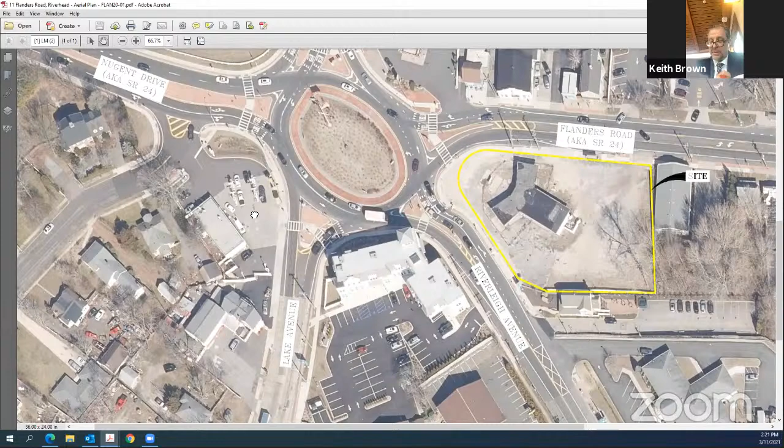The only other thing I'd like to point out in my overview is that we thought it'd be helpful for the planning board to see what the buildable envelope is of the property. Because of this irregular configuration and its location on the traffic circle, when you incorporate the town's zoning code bulk requirements, you can see that the overall building envelope is extremely limited. So my point being that there's no way around the fact that we need some variances.

What we've done is worked within the confines of the irregular shaped parcel located on the traffic circle, and we've come up with a site design after multiple variations. I'll allow Mr. Tartaglia to talk about it in a second, our civil engineer, but the home plate design was really the most advantageous for multiple reasons, which he'll elaborate on. So with that, I'd like to introduce Mr. Chris Tartaglia, Principal of High Point Engineering, our project engineer.

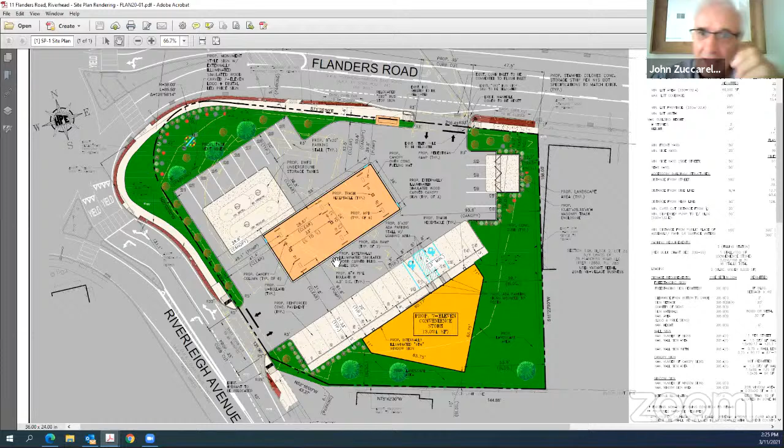So they still have access to the three other roads, and they limit someone going out into the road, possibly not being able to get a space to get in between, and not backing up the people going south into the circle. So I'm not saying to do it because I'm not a traffic engineer, but could you look at the possibility of limiting the egress onto Flanders Road to a right turn only, and then direct traffic for those that may wish to go to one of the others, that they simply take the other side, they can go out onto the road. My comment is ended.

Mr. Zuccarelli, I think that's a great point. I'll address that right up front. Just for everyone's benefit, my name is Andrew Villari. I'm a traffic engineer from Stonefield Engineering and Design on behalf of the applicant.

So regarding access, just taking one step back, Flanders Road is a DOT roadway. Riverleigh Avenue is a Suffolk County roadway. We did submit this plan to the state back in September, just to make sure they were comfortable with the type of access we were showing. Mr. Zuccarelli, you're right on the money — left turns out onto Flanders Road, the state would not be amenable to. So in terms of exiting traffic on Flanders Road, you'll have to make a right turn out. And it's not the worst case in the world, because if you're trying to go any other direction, you could use the driveway on Riverleigh to get back to the roundabout and head all points. I think that's a very astute comment that you made.

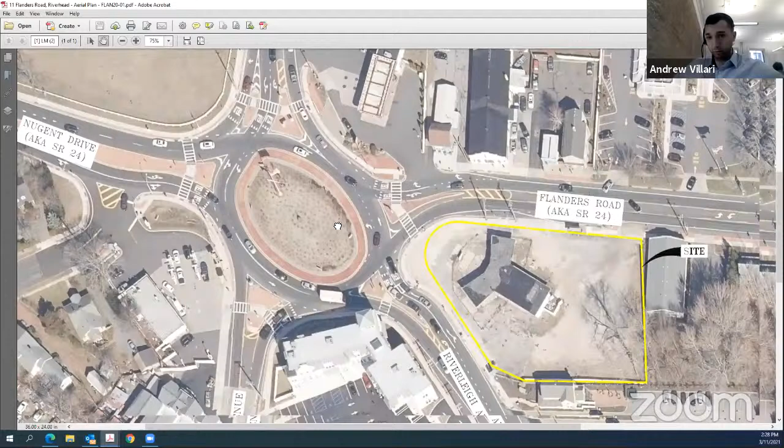And in the same vein, the pedestrian improvements are key here. Previously, I don't think it would have been a great environment for pedestrians. But after this application, I think the county did an amazing job designing this. There are pedestrian refuge islands basically in the middle of every approach. So if you're heading from downtown Riverhead and you want to walk into the 7-Eleven store, you do have the ability to do so. It's all very well connected and very well orchestrated.

You may be thinking, why would someone walk to a 7-Eleven with a gas station? That's an okay thought to have. It's because this development is not going to be like the other two gas stations on the property. The other two have convenience stores, but as Mr. Brown mentioned, they're very, very small — there's not a lot of offering. The new 7-Eleven prototypes, I'm not sure if you've seen some of them around the island, they're very nice, very modern. There's a coffee bar inside, there's a fresh food offering. Those types of offerings would entice pedestrians. I think it's a great location for 7-Eleven because of the pedestrian improvements and what enables people to get on and off the site so safely.

Transitioning from pedestrians to vehicles, because this is definitely going to be a vehicle-based development — it's a gas station, of course — this use, in my review, is a very good use for this intersection. Now, I say that for a number of reasons, but probably first and foremost is that a gas station previously existed here, and there are other ones in the area. What type of traffic is associated with a gas station or a convenience store?

It's what's called in the industry pass-by traffic. You're traveling through the roundabout, heading in any different direction — maybe you're going to work, maybe you're going to points east. You're heading through the intersection, you need to get gas, you see a nice 7-Eleven gas station, you pull off, you hit the site, you get the gas, you get your cup of coffee, and then you keep going. You were already going through the roundabout as it was, so you're not necessarily adding new traffic to the development.

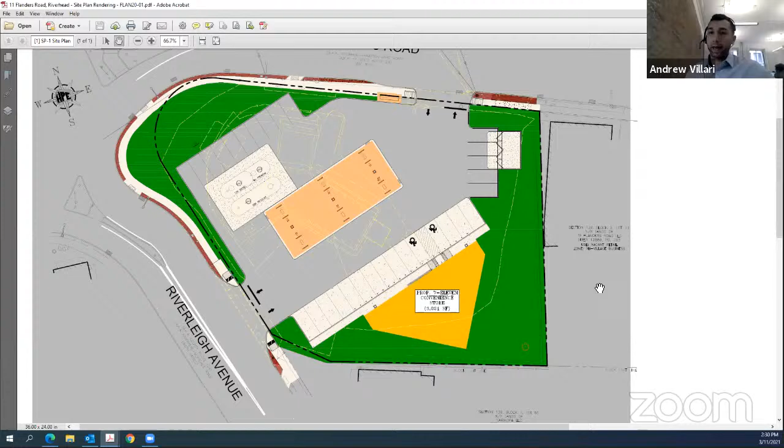Mr. Trezza mentioned that this is a highway business district, so any of the typical uses in a highway business district could go on this site. Those uses would have more new traffic added to the area. If this was an office, there'd be more traffic. A 7-Eleven just preys on the traffic that's already adjacent to it.

So it's actually a very good use here for not increasing the delay that you may be accustomed to going through the intersection. We are in the process of wrapping up a traffic impact study. We'll be more than happy to submit that to this board before the next meeting. We are doing a level of service analysis where we've done counts and analysis. The early indication is that the driveways would operate very well given the site layout.

Like I mentioned, the access on Flanders would have left turns out restricted, and the access on Riverleigh would be restricted to right in, right out only. When you restrict certain movements, you may have unwanted traffic in other places. If you can't make a left out, how do you get where you're going? Being located on this roundabout is a great thing, because you could make a right turn out and still go in any direction you want, since you're going to get into the roundabout and you can go all 5 points here.

So just want to conclude here. I appreciate everyone's time listening to the application, but I really think this is a great application for this intersection that's been the subject of some blight for over a decade.

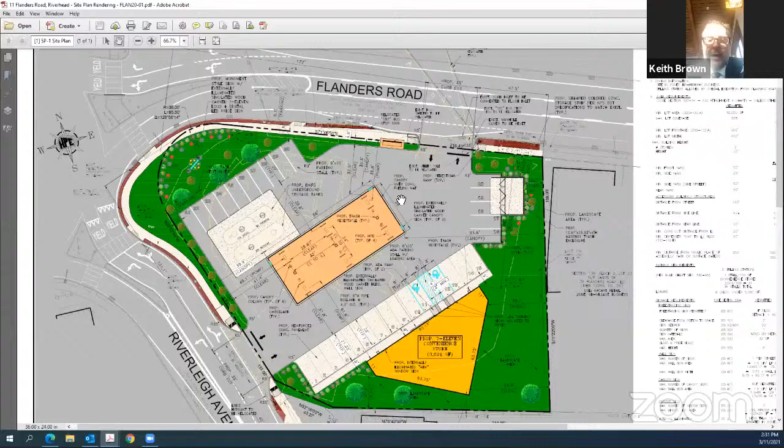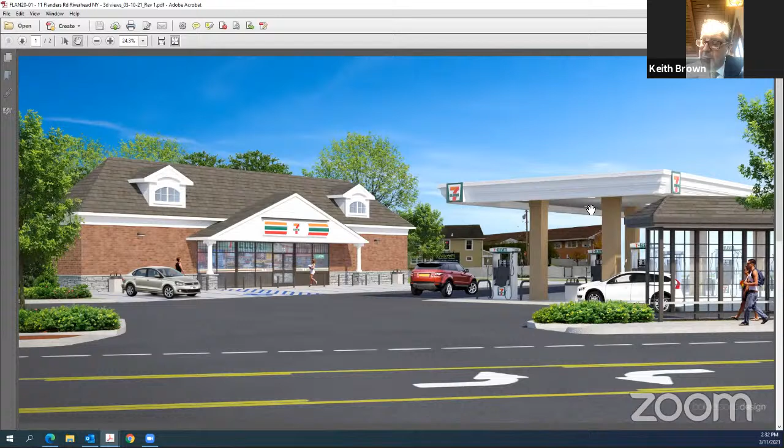Thank you, Andrew. And just two more points I'd like to bring up, Madam Chair: if we go back to the color renderings, Chris, we have enhanced architecture. Specifically, we have a cultured stone water table on the building, doghouse dormers on the roof. We have moldings, columns, and appointed details, as well as the canopy made of a beautiful crown molding design, as well as the enhanced landscaping.

So that concludes. Is that 7-Eleven corporate architecture?

This will be the only 7-Eleven that looks like this on Long Island. The one up on Flanders, further west? I'm not familiar, but this one is 7-Eleven, not far, going south. Yes, right, excuse me. This design is unique to this location. It looks like the one south. Yeah, it looks similar to me. I don't think so, but the dormers are there. The one on Flanders River Road, it's HardiePlank. Yeah, HardieBoard.

Can I ask a question, please? How does the 7-Eleven convenience store improve the downtown? You made a statement that it improves the downtown. I'd like to know how it does, and I also want to know how this fits in with the overlay district.

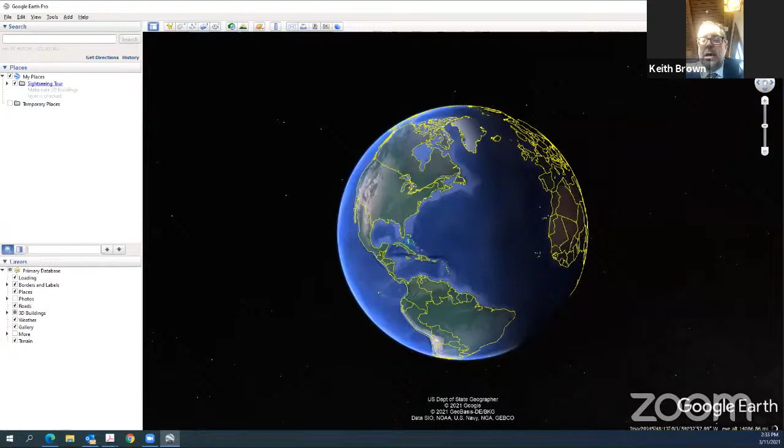Sure. So as it relates to the downtown, having a convenience store where people congregate, you might have a family ride their bicycles down, or kayaking available right on the Peconic River there, or people out shopping who want to walk across, as Mr. Villari said, there's now pedestrian refuge places where they can utilize that.

I'm trying to understand how this improves the downtown, and how it fits in with the overlay district. Sure, it fits in with downtown in a number of different ways. As I was saying, people who are out on their daily routine come to downtown Riverhead, and they don't necessarily want to stop for long. They want to grab something quick, a cup of coffee or something because they want to get to where they're going, or they're out shopping or whatnot.

But in terms of the overall overlay district, the owners of 11 Flanders have been paying attention to what has been developing in the town. The idea that sewers would come to this area has been talked about for the better part of a decade, but there is no hope in the future of ever getting sewers anytime soon. So the point is that they tried to do several different developments, but ultimately this is the only one available where they had a proposed tenant interested in utilizing the property. So it creates an opportunity for the town to repurpose this site.

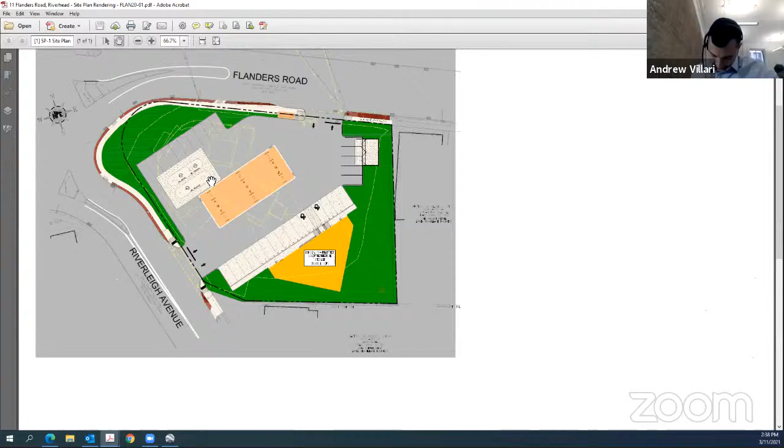Deceleration lanes to get into the driveways? I don't see them, so I'm just saying you might think about them, okay? You also will have guaranteed landscaping trucks coming into this gas station, and the landscaping trucks are the length of a truck plus the length of a trailer behind them. The parking stalls or parking spaces are not going to be sufficient, so you need to take that into consideration.

My question also is, is 7-Eleven a gas station now? Are they branding themselves as a gas supplier? This is not a new concept for 7-Eleven - they have many gas stations on Long Island currently and across the country. So it's their branded, private branded gas. That's correct, in Manorville.

I think one of the biggest issues that we have here is the accessory use. Would this be happening without the 7-Eleven? Would you be entertaining putting in a gas station without a 7-Eleven? No, would not, it would be impossible.

Okay, our code would not look at this and say this 7-Eleven was accessory to - it's a separate use. Anthony, are you there, can you step in? What I would say is I don't want to get too crazy because I'm going to prepare a report identifying the issues. But one issue the applicant should be aware of - they were involved with BOLA, where the planning board raised the question about the 2,000 square foot building at that time, which was reduced to 1,200 square feet. So the size of the building is going to be an issue. While that's a determination of the Zoning Board of Appeals, the planning board has generally been advising the zoning board through their referral comments about the size of the building. So that's going to be an issue we'll discuss. And just one comment - the applicant doesn't have to respond, but the dumpster sitting on the road is also a major issue.

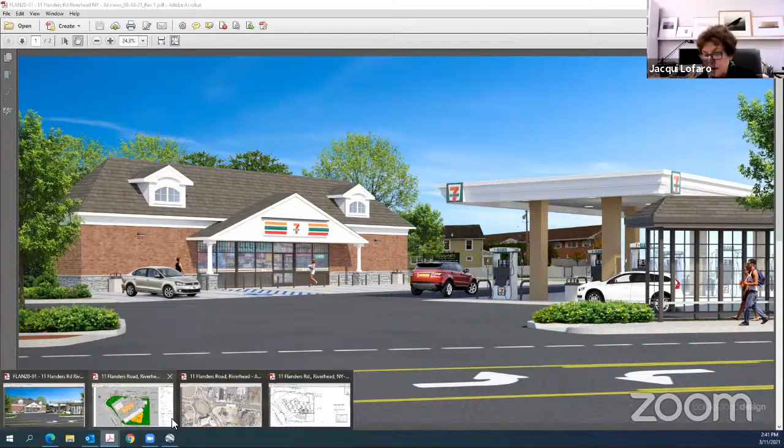Is this a high priority area at all for septic? Yes. Okay, so you're aware of that, Keith? Yes, we are. Okay, you are.

So I think you've heard a whole bunch of questions. Jacqui, I have a comment, if I may. The applicant has gone on this afternoon telling us how great this convenience store is going to be for the neighborhood, that people are going to be walking in and shop here. And that tells me that they're not looking at it as an accessory use to the gas station. So I'm hearing it's one thing, but they're trying to put it into our code as an accessory use.

If I may, Mrs. Burke. Yes. I am abundantly aware of the attempts by Riverhead and Southampton to make downtown Riverhead more walkable. I was merely pointing out that we have anticipated that in our design, that we have sidewalks that tie into the work done on the circle that Mr. Villari talked about, so that pedestrians crossing through the side of the traffic circle have refuge points they can go to, and then get onto our site without being immediately into a parking lot. That was really what I was trying to say.

But in terms of the use itself, they complement one another. You're also talking about the fact that it'll enhance downtown Riverhead. So I think you've made me believe that this is a separate use, not an accessory use. Well, I'm sorry if I led you to believe that, but I was merely pointing out how the use will fit in with the surrounding area.

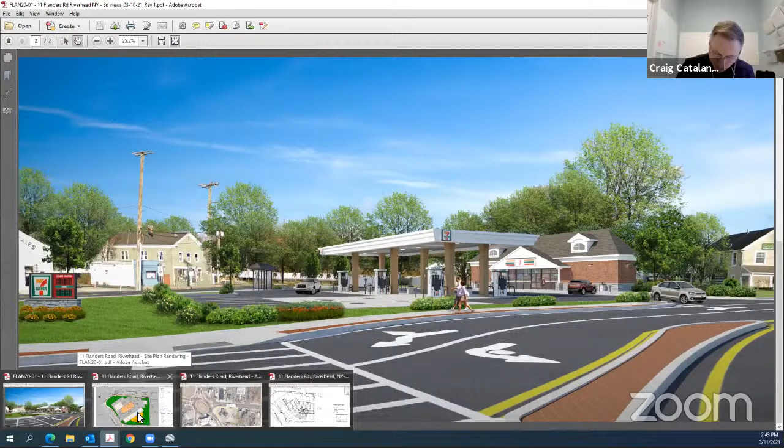Maybe you should think about putting a full-fledged supermarket there. That would be popular, because as Dennis said, this is a food desert, this area, and what it needs is a wonderful supermarket. You do have the farmer's market. I was just going to say, there is a farmer's market on Flanders Road, not that far down the road.

So I would submit to the board to think about the fact that 7-Eleven offers many of the things offered in a supermarket, just at a smaller level because it's a smaller size store. So in terms of grocery items and sundry items, many of them do, and they also have prepared food items as well as many supermarkets do these days.

You would not say, or you're not going to represent that 7-Eleven is competitive with the prices of a local supermarket? No, but we like to call ourselves a convenience market, a smaller scale size, for people who just need a quick item, you know, you're going somewhere that day and you remember you forgot a set of forks or paper plates, so you grab them and buy them and walk out the door.

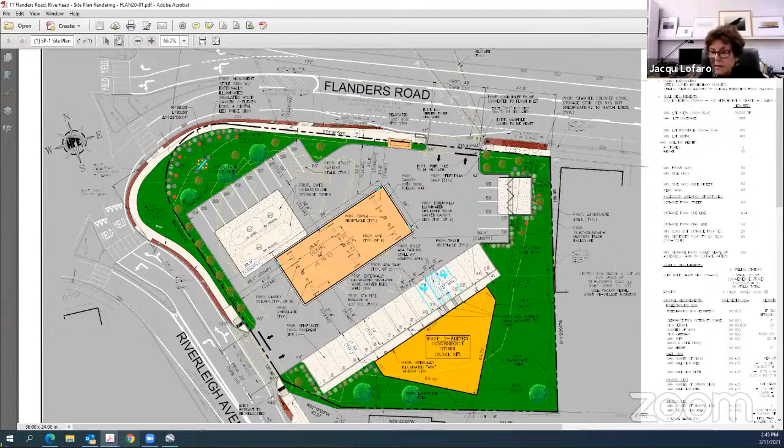Mr. Villari? Andrew, you want to tackle that? It'll be incorporated in the study, yes. What do you mean? In the traffic, okay.

Are there any other comments from the planning board? No. I have one quick question. You had mentioned the shallow water table. Do you know where the water table is in relation to the fuel tanks? I'm going to defer to Mr. Tartaglia. Okay, so Mr. Tartaglia, he actually worked on the other gas station located in the circle that had a similar issue.

Chris? Okay, yeah, groundwater is at about 5 feet below grade. So just like every other gas station at the circle, the tanks will be partially within water, but they're up to the task of being installed in water and surviving there. They do it in Florida every day, and groundwater is 1 to 2 feet deep in Florida, and there's plenty of gas stations there.

And what type of septic system would it be here? It's a conventional septic system with leaching pools, but it will be at a shallow depth. So as I explained, we need a little bit of a larger horizontal footprint because the depth of water is shallow. But you're in an IA, you're in a high priority area. That's what I'm asking. Right, we've already vetted this with the preliminary design with the health department for septic, and they're fine with it. So there's no septic issues here whatsoever.

Is it not a town issue? What's that? Anthony, doesn't the town require it? Yeah, if I have to double check, I don't have the ability to do it now, but I'm pretty sure this is the high priority area. If it is, it would have to be the new IA system, regardless of what the health department says. That's why I brought that up. Yep, that's accurate. We'll double check that, Gloria. Yeah, and the health department starting in July for any new construction will require an IA system.

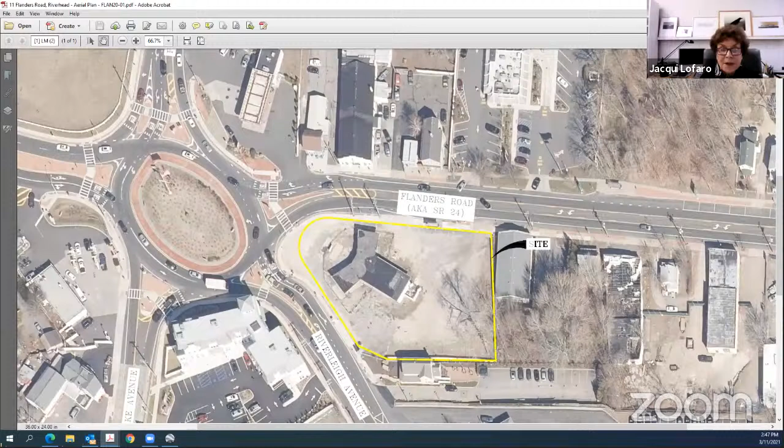Correct. Okay, so you have a shopping list of comments from us. And I took copious notes. I hope you heard them all, from solar to groundwater to traffic to accessory use, which is key. And so we'll leave it at that, Anthony. That's all. Where's Anthony? Yep, I'm right here. Okay, so you're going to write up a report.

Now, what about this pre-submission conference? So you're going to have the conference on the 25th. It'll be opened up to the public. You'll give a presentation again. We'll see if there's any comments from the public, from the CAC or any other groups. And then after that, within I believe it's 45 days, I'll bring a report to this board. You'll get it obviously before the meeting, and we'll go through all the issues.

Okay, very good, Madam Chair. Thank you, members of the board. Really appreciate the time, thank you very much. Thank you for coming. Yeah, all right, take care.

Okay, so we'll close out the work session and go into the afternoon session. Matthew, you're up first for completeness on number 2, Paris Project Management.

Can everybody see that? I'm just having a little bit of a connection issue. If you can see the— Yeah, we can see it, yep, good.

All right, so this is on for completeness. It's a lot line modification in North Sea at 1005 and 1017 Noyack Road. This came about via the health department. They did a correction deed back, I believe, in the late 80s that the health department just picked up on, that was never approved by the town. They just did it themselves. Unfortunately, they're missing a number of things on their map, mainly just to actually show the modification that's going through.

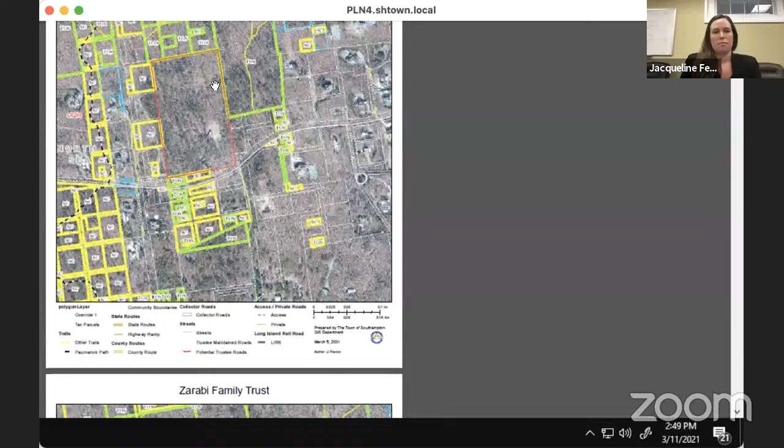Can everyone see the aerial? This red parcel here, this larger red parcel, is the subject property. It has minimal frontage on Great Hill Road, but it does have just enough.

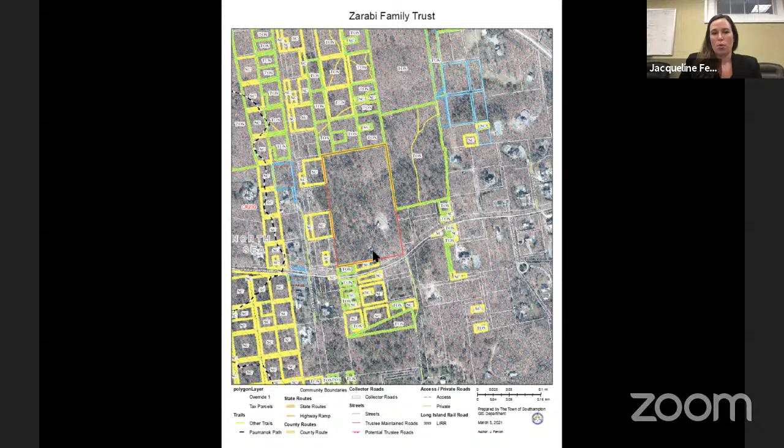With the planning board, we determined that it has a yield of 2 lots. They are providing a cluster plan, which has the lots orientated where the existing development was for the previous house and accessory structures. This is a zoomed in aerial of this.

Daphne, I believe these structures have been removed, am I correct? So the planning board issued a resolution of no objection to the demolishment of the existing structures, which was a single family residence, pool, and some accessory storage buildings in the back.

This is the proposed plan. Sorry, the topo kind of makes it hard to see on the scan, but essentially this area is all open space. The dark portion here is showing a proposed buffer, but this area here would be all proposed open space. They are using the benefits of the density incentive portion of the code, which is 330-9, to add 1 additional lot, which they are bringing from the CR 200 zoning district and from the school district, which is a town code requirement. So it does add the yield of 1 lot.

As you can see, they're accessing this via a common driveway for lots 1, 2, and 3. I prepared the applicant's EAF, part 1. Okay, can we ask some questions at this point? Oh sure, please.

You can get 3 buildable lots with this topography? We asked them for a slope analysis, so they'll have to give us a little more information on that. But I did walk the property. It's more hilly, essentially it looks flat where they had the house, but it does gently slope down, nothing extreme. I did walk the property during the pre-application review.

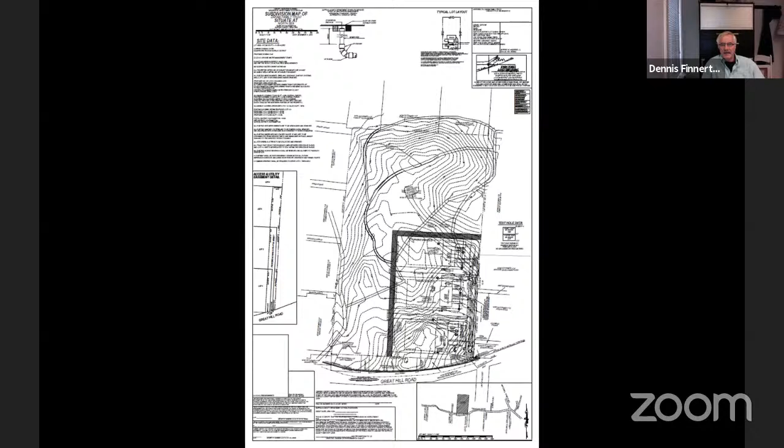I was getting this surfaced 2 or 3 years ago, and I would have thought this would have been resolved. I mean, are we going to say that this could completely change the map, the square footage? This is proposed open space that's going to be dedicated to the town. I mean, do we have a complete application with this major issue unresolved?

We were recommending that we do SEQRA and then deem it incomplete. Why would we do SEQRA? Because we have submission requirements, and they need the SEQRA determination to finalize the health department.

Yeah, but the question is, if that objection is going to stay with that property, and if he's been using that for a long time, you've got a serious issue there, and you haven't been able to get him to respond. Why are we proceeding with SEQRA?

I think we should just deem it incomplete until the information comes in. Also, I'd like to see this corner, the access to all 3 lots off this little corner, which we can't see, off Great Hill Road. I mean, there's some issues here.

Jackie, just so you're aware, it's 39 feet of frontage with a common driveway. I can try to zoom in, but... Of 39 feet of frontage, is that sufficient?

Or do they need a variance for that? No, they don't, because it's only 30 feet required. They don't, because we opted for the cluster plan for the open space benefits, so we're allowing them each to have around 10 or 12 feet of frontage. And access by one?

You're waiting for a slope analysis, which is not here. You're waiting for the determination of how they resolve this trail. I would say that I don't think we should proceed with SEQRA.

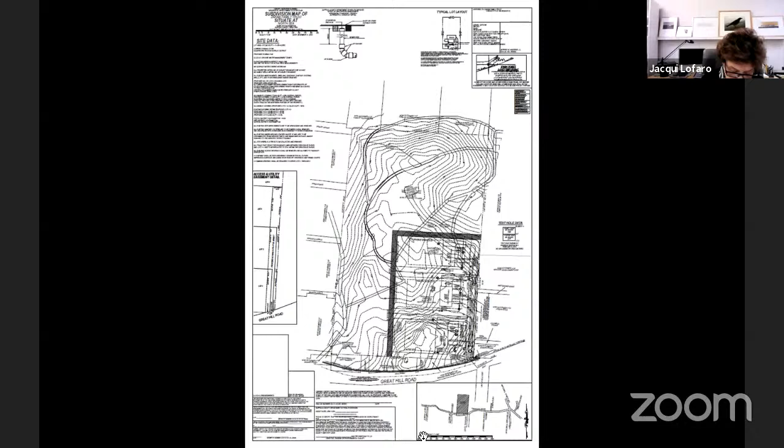Shall I have a motion to deem this incomplete, by Robin? Motion. Second by Dennis. All in favor? Aye. Opposed? Abstention? Six in favor.

Thank you. Jackie, again, Lillian Court, completeness. Yes, give me one moment to pull that up. And I don't believe the applicant, William Bates, was attending, but just in case he was able to log on.

Charles, is there a William Bates in the waiting room? Does he have a motel? I was just thinking the same thing. I'm sorry, thank you for doing that, Gloria, I really didn't want to do it. You're welcome. No, thank you. We could all use a little laugh.

Thank you, no William Bates. Okay, that's fine, he was aware of the issues. So go ahead, I'm just going to bring up the aerial.

All right, can you see that? This is a zoomed out aerial. This is a lot line modification between these 3 properties. And here's a more close, zoomed in aerial. So these 2 residential properties are essentially transferring some of their area here along their shared boundary, and then in exchange, they are getting a little bit wider to the north.

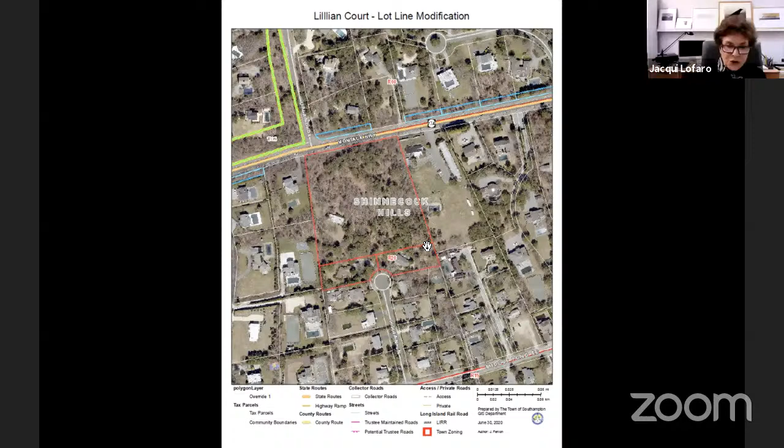Do you have a — there you go, okay. So if you can see here, they are right now flush. They are proposing a flag strip to gain access to Lillian Court, and this person is getting an equal exchange of area with that transfer. This property owner is proposing a larger area of transfer, which would give the 310 Montauk Highway access to Lillian Court.

Well, how are they getting in before? Lot 2, they had no access? They have existing lot configuration on Lillian Court. They came off Lillian Court, lot 2 and 3? Yeah, these homes are existing homes coming off Lillian Court. These both have driveways right here, and this one has a driveway right here.

Okay, but it's a pre-application. We deemed it incomplete in the summer. I do now have all the information I need to deem it complete and schedule a public hearing for April 8th. April 8th, yeah.

So basically, lot 1 can get access off of Lillian Court, and they don't have to use Montauk anymore. Correct. And then they are proposing an easement right here over this area, which we will discuss further upon review. But I just wanted to make you aware that this does give an access easement as well, I believe — to lot 3. Yeah, so over lot 3, they're giving an access easement over that portion to lot 1.

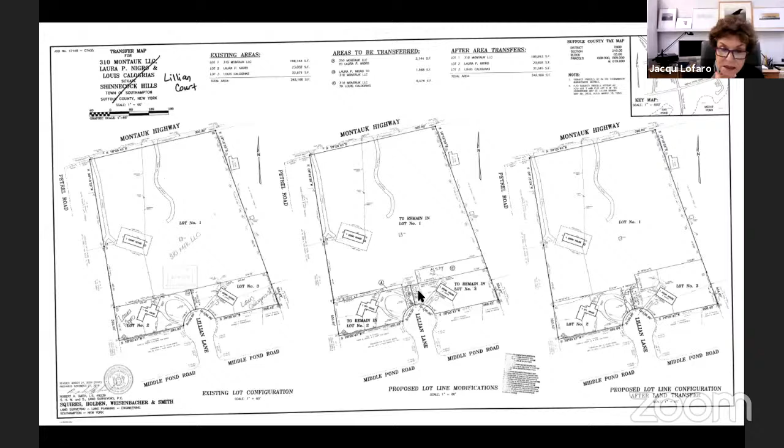Are they going to further subdivide this? Depending on how the easement is orchestrated and how we review this, it would possibly give future development and subdivision and access from Lillian Court to 310 Montauk Highway. I'm just asking you if that's their intent. They haven't said that specifically, but I believe that is their intent.

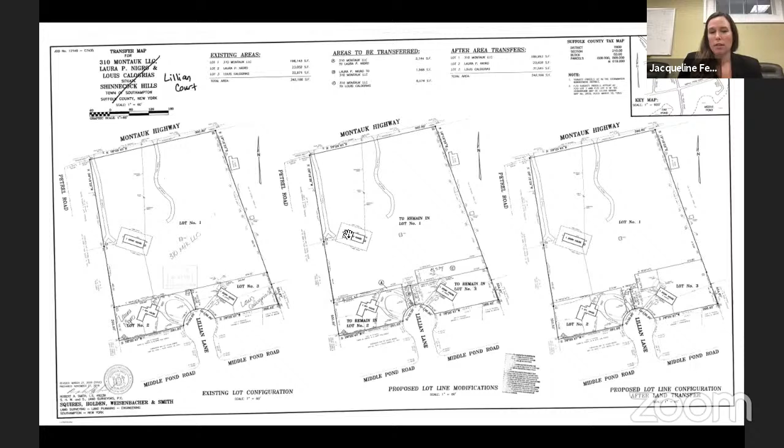Are they closing off the access on Montauk Highway, or is that access? Well, right now there's an existing house, so this is just a transfer. We can ask the applicant's attorney if they're proposing to physically alter the existing access at this point. Okay, so we're deeming it complete.

We're setting a public hearing for April 8th. Can I have a motion? Motion by Dennis, second by Gloria, and all in favor. Aye. Opposed, abstention, 6 in favor. Thayer's Hardware, Matthew.

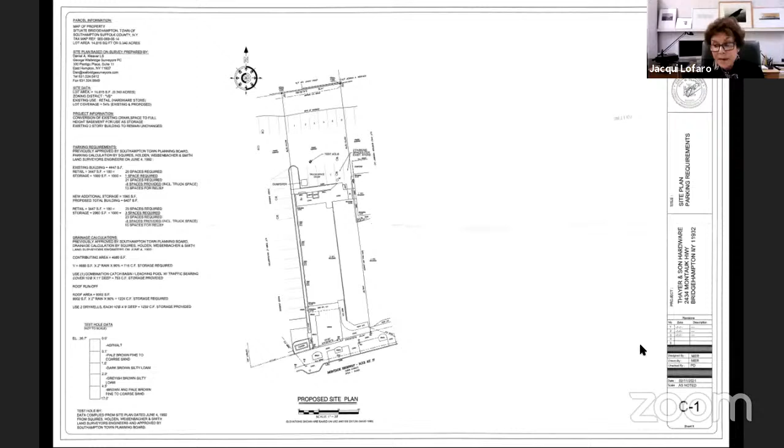Right, it has to be monitored. Yes, absolutely. How long do you think it'll take? It's a combination of hand digging and some electric machinery. I consider this, start to finish, to be about a 70-day project. So just double that, right? Always, we don't want to.

When is this supposed to start, best case? Dennis, is the storage going to be in the original building or the 1992 building, just for clarification? It's in the original building, on the eastern side. Correct, so it would all be coming out of the door that goes down into that as well.

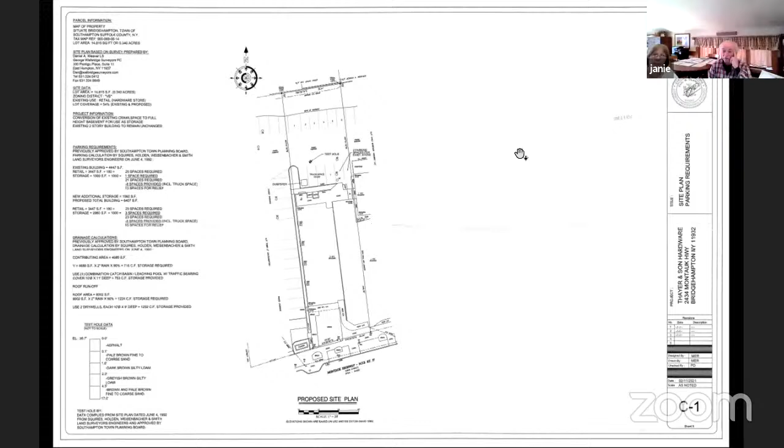I don't see an issue with expedited unless, but I'd like to put those conditions in, regarding how the dumpster will exit the property, et cetera. Jackie, the town engineer, has seen this already and issued some comments. They want to make sure there's no damage done to the adjacent parking area that they just redid. They'll ask for some kind of control measures to ensure that.

I did make findings to waive the hearing if everyone's okay with that, and it'll be referrals, in this case, to the fire marshal and the engineer's office. I don't know that it needs to go anywhere else.

Best case scenario, when would you be starting? We still have to go before the building department, obviously. So what we might consider, as we've been talking about, is as this moves along, if we need to, we'll just move it out of the summer traffic there. There's a lot of traffic back there. Into late fall, yeah. That's why I was asking for your best case scenario starting date, because I was thinking of the summer.

Well, we'll all be here in the fall, so we're okay with it, including...

Matthew, just make note of that, how the debris should not be taken out onto 27. Got it. The dumpster's going to have to exit west. Right, west? Yeah, north, actually north.

I walk through there all the time, taking that shortcut. Watch out for it, I feel sorry for that poor house on the corner there, every time I go in that back way. That's Maple, is that Maple Avenue? It's Maple. Maple runs across, parallel to the train station. Yeah, it's Corwith, or it has some funny name. Anyway, would you add that? Yeah, it's further south, you're right.

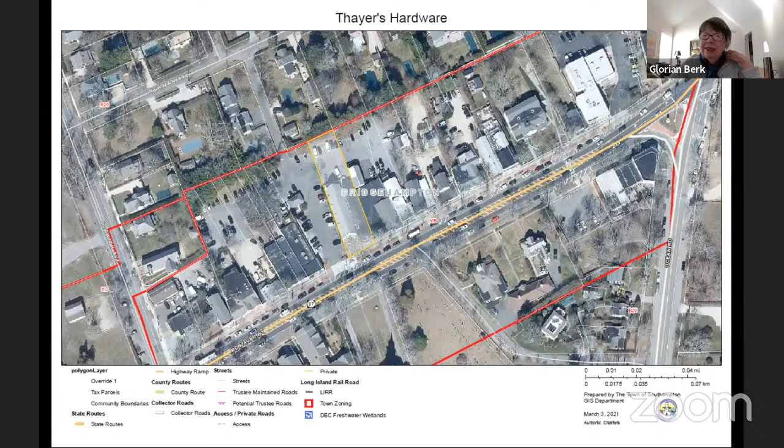All right, so I have a resolution prepared to deem it complete, set a 30-day written comment period, waive the hearing, and that'll go out. So, provided we hear back, this could be a pretty quick turnaround for the applicant, just to get this going.

I'll move it. Who said they'd move it? Dennis. Okay, second by Gloria, and all in favor? Opposed, abstention? Six in favor. Thank you, thank you, thanks for coming.

Clare, the Sag Harbor Antique Fire Museum.

The applicant submitted a revised plan, and I'll show it to you in a second. The applicant himself, Ed Dearman, couldn't attend, so he had Dennis Downs attend, but I don't see him. I just emailed him. So if you want to just table this, unless you have some comments, do you want me to just show you the changes?

And I have one comment. I think I saw it. I think that the entrance and exit should be closed off on Scuttle Hole Road. I think it should be totally closed. Do you want me to show you the plan?

Yep, we can just look at that real quick. I don't think it's closed, right? No, it's not closed. So this is the aerial, and here's what you're talking about, the Scuttle Hole Road. Yeah, and then Fire...

And then Geyer, which is right now - if you want to see the revised plan, which shows both the site plan and the interior, this is where they're having their parking spaces. And there's no proposed parking around here.

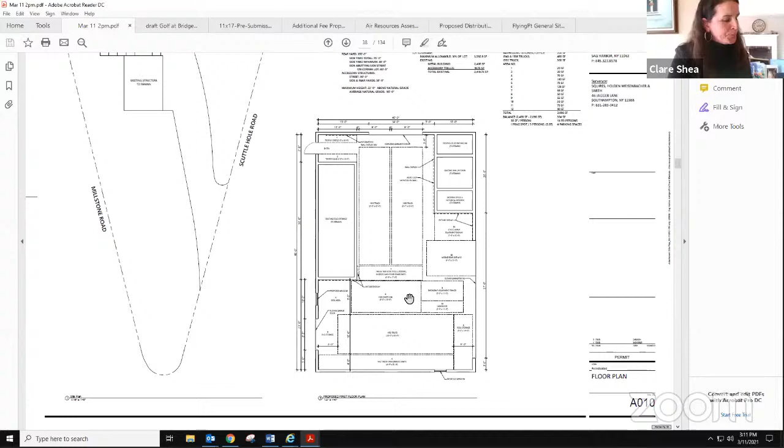And then we would want it closed off with some kind of nice looking gate, and not used at all until it was necessary to use it. Okay, great, I will. Thank you - no action. Anthony, Speonk property.

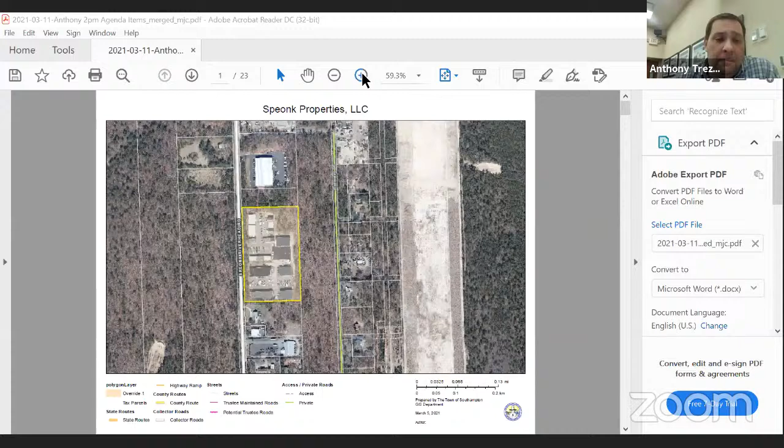See, okay, you can see that, right? Good. So this is Ed Broidy's site on Speonk Riverhead Road. Every couple of years we get something new that comes in here. This is largely actually built out at this point.

So I got an application for a special exception to use one of these units, unit number 39. I don't know which building that is because it wasn't clear from the plans that were submitted, for packaging and warehousing of spirits.

I'm recommending that we deem this application incomplete. I spoke to the applicant and I sent you guys the checklist - we're missing maps. I need more details about how this operation, how this business operates, and if there's any other future plans to actually do the alcohol production in there. So there's just a whole bunch of series of questions and additional information.

So at this point I would just recommend that we deem it incomplete, and when I have enough information I'll put it back on for a better discussion. Motion to deem it incomplete, second by Craig. All in favor - aye. Opposed, abstentions - 6 in favor.

Okay, we're moving on to 3539 Foster. That's Jackie - that's an extension. Jackie Fenlon: yes, so they had filing issues with the county clerk's office, so they have remedied those on the map. This would be an extension so that we can acknowledge the signature and do a resignature, bringing them to April 26, 2021.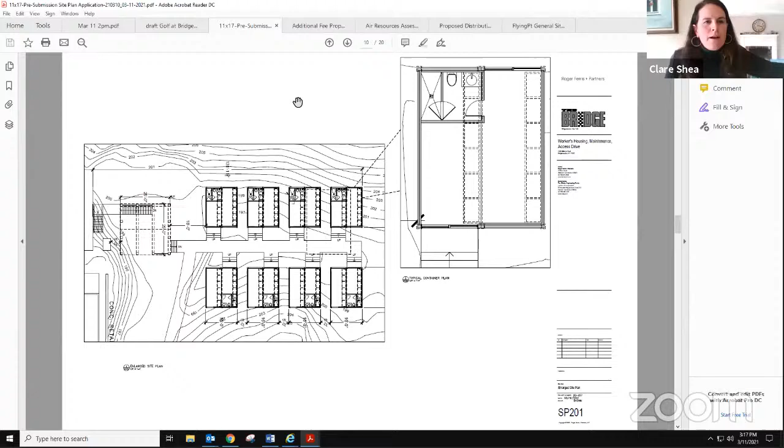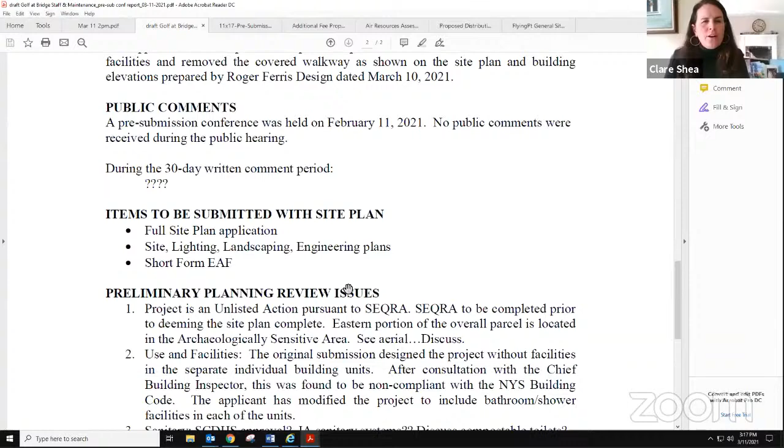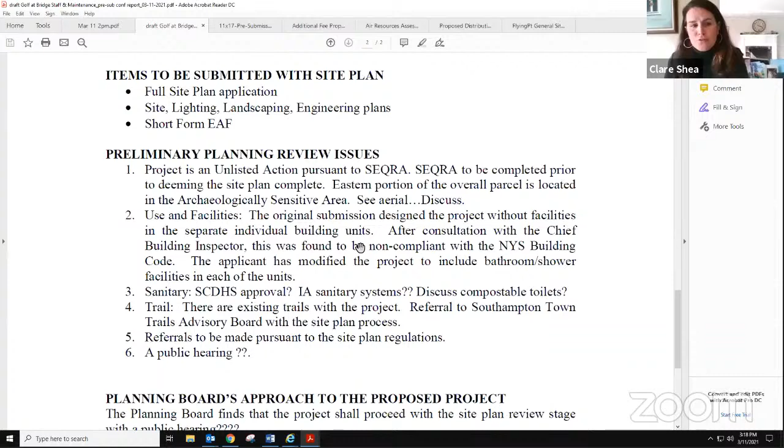Okay, so this is the details. I'm just going to go over quickly and then have the applicant speak. Some preliminary issues on this: it is a SEQRA unlisted action. The eastern parcel, I'll put up the aerial in a second, has the archaeologically sensitive area. Obviously the whole site was investigated as part of the DEIS. If this parcel were split off, there would be no question, it wouldn't be in the archaeologically sensitive area, but whether you want more investigation is the question for this area. Then there's the question about facilities, which they've modified to include the bathroom and showers in each unit. We could talk about health department approval, use of IA systems, and of course the compostable toilets. There's an existing extensive trail, but we still do a referral to the Trails Advisory Board on this application, and then typical referrals for the project. And whether you'd have a public hearing or not is the question the applicant would like you to address.

So Jake, do you want to respond to some of those queries? Yeah, happily. I guess first, with regard to the archaeologically sensitive site, like Clare mentioned...

This area is not in that specific boundary area, it's outside of it, well outside of it. Should this particular area be subdivided, it wouldn't be a condition at all. There won't be any basement, there'll be minimal site intrusion, and the foundation will also be minimal. We're only planning on using sonotubes for the structures that are going to be placed on top. It also wasn't a consideration in 2009 with the original maintenance workers housing. The whole goal of this, again, is to basically displace a number of living units from inside the existing workers housing and put them outside the building, in the form of these container housing units. We've placed individual bathrooms in each individual unit to address the concerns that have been brought forward previously. We intend to tie those bathrooms into the existing septic system for the maintenance building. We're not increasing the number of living units.

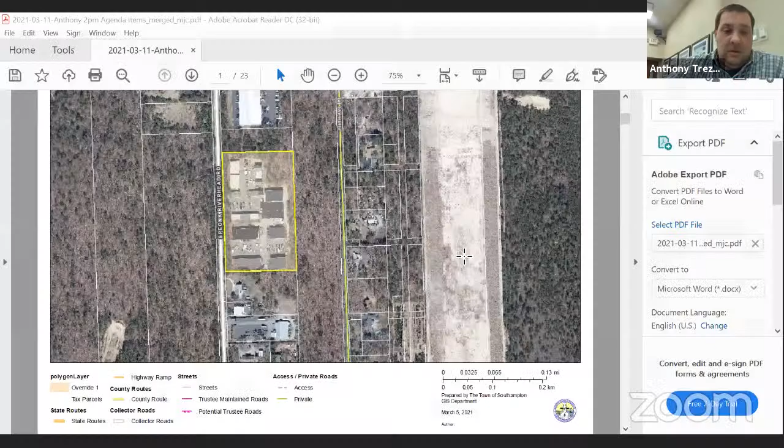Anthony, Old Stables at Speonk. Yes, a 7-lot subdivision. Okay, you can see that, right? Yep, good. So we've been looking at this for a long time now.

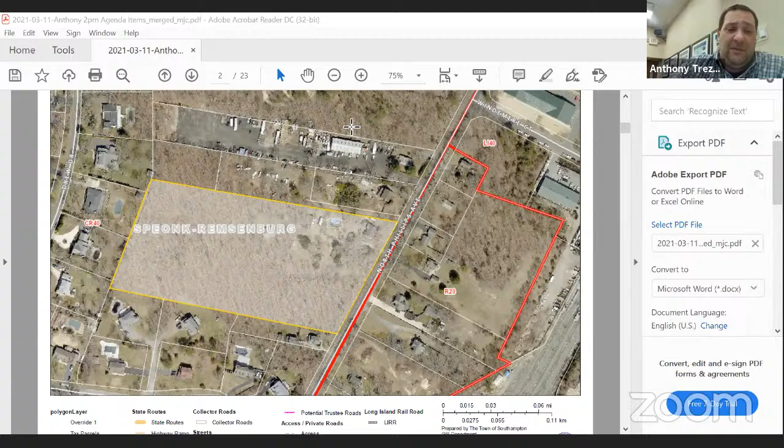This is a subdivision on North Phillips Avenue in Speonk Riverhead, Speonk Remsenburg, CR40 zoning district. This is the property here, has an existing residence and some other accessory structures. It's adjacent to, I believe, some open space from this subdivision. And you have this development over here, and I believe there's town land over here.

This subdivision involves 25% open space in the back, which connects with the adjacent open space, and a 7-lot plan.

This property had a 6-lot yield, was initially reviewed and processed as a density incentive subdivision with 9 lots, but unfortunately we weren't able to process it because it didn't meet the requirements under the code. So it went back down to a standard cluster plan, 6 lots with 1 density incentive unit for a 7th lot for affordable housing. So it'll be 6 market rate and 1 affordable unit.

I don't know which one of these units is affordable, but it's probably labeled on the map. The lot size is roughly around 20,000, less than 40,000, so it would be R20 setbacks.

We've been looking at this a while now. We've done all the referrals. We were supposed to have a preliminary approval for this months ago, but like I said, we had to change the plan, have a new public hearing, and redo SEQRA. So we did all that. I resent the referrals, and I finally have a preliminary approval for this project.

So this is the resolution, all the standard information in here: a description of the project, the SEQRA classification, the negative declaration issued in February of 2020, the dates of the pre-application report, the public hearing dates, and conformance with the Long Island Workforce Housing Act.

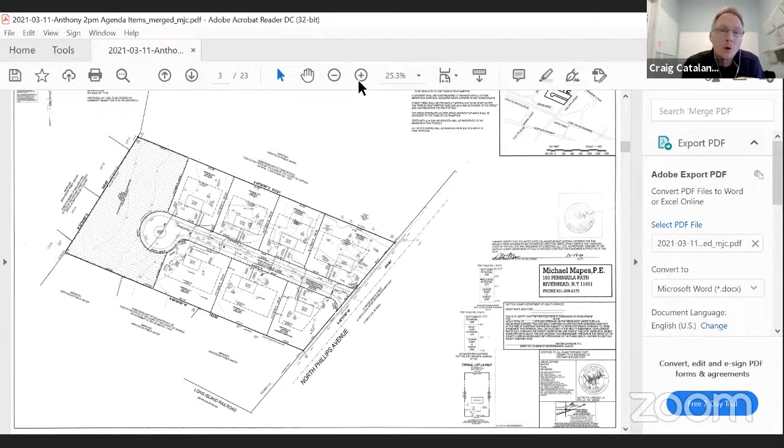Okay, good. I know this area fairly intimately. It's not far from where I live. The lot two lots to the north overcleared the property and created a runoff issue, which was swamping the abutting community on Drew Drive. So I know there's going to be an engineer's report. I would just ask that they look at how that runoff looks fairly carefully, because the runoff issue was very significant and it created an uproar in that area.

Okay, good point, Craig. Good. Thanks, Craig. You bet.

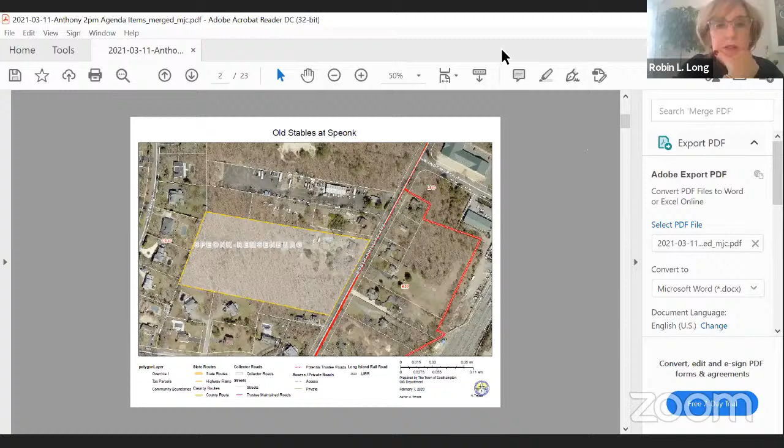Anthony, on the existing structures that are being demolished, were there in-ground oil tanks or wells? I don't know the answer to that, Robin, to be quite honest. I could find out for you.

Yeah, I'm getting a little more sensitive in terms of the environmental aspect. When you have these older constructions being torn down, we don't want them to just leave old oil tanks in the ground. Not just decommission them, they should be removed. And the question is, if they're bringing water in, is there currently wells here, and do they have to be dealt with? So what I'll do, Robin, is add that in the resolution where I talk about the removal of the structures. I could add a statement about verifying the existence of any oil tanks and wells, and if so, the applicant will need to properly remove such structures.

Yeah, I don't like to decommission oil tanks when we're building over them because they stay in the ground and eventually start to deteriorate. It's one thing to have that, but I'd rather see them pull them out if they exist. Okay, yep. And to Robin's point, these items should be an automatic checklist item when we're decommissioning or taking down existing structures. Two more I's to dot.

Yeah, yep, for sure. Thank you, Gloria. Good. Thanks, everybody.

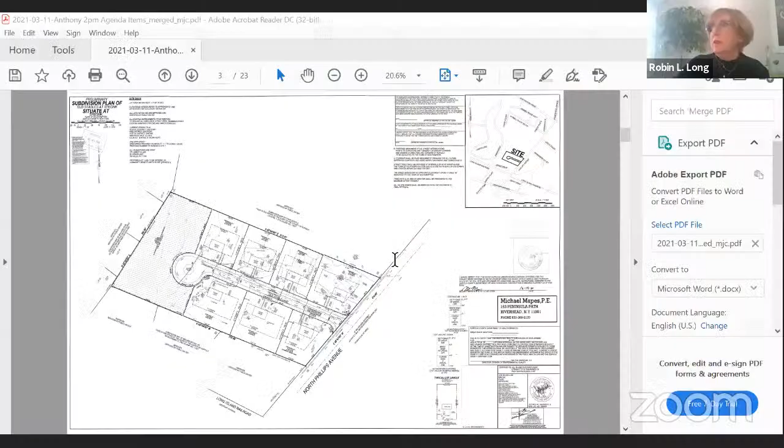Okay, so this is a two-lot subdivision. Madam Chair, I'm going to be stepping out for this briefly. Sorry, Kathleen.

Okay, so this is a two-lot subdivision, standard subdivision, 150 Head of Pond Road, CR-60 zoning district, agricultural overlay district, high priority water quality improvement zone, and the New York State archaeological sensitive area. Just by way of background, this adjacent property was recently the subject of a ZBA determination that this property was held single and separately from this piece. I had raised that issue prior to the completeness review, and they went to the ZBA and got a determination. So I just wanted to clear that up right from the get-go.

Okay, so we did our referrals, we had the hearing, so I have a report here. The first page is just a description of the project. I have this grayed out because I want to put the actual ZBA date in there. So it's just a description of the project, a little history of the project. What was the ZBA decision? It was that an adjacent property was held single and separately. Yep, got it. So it didn't have to be included in the subdivision. This is a standard plan, total of two lots and four acres. The planning board determined that a PRD was not necessary in this case, given that there's no existing open space. This will be reviewed as a minor application. It looks like everything conforms to zoning.

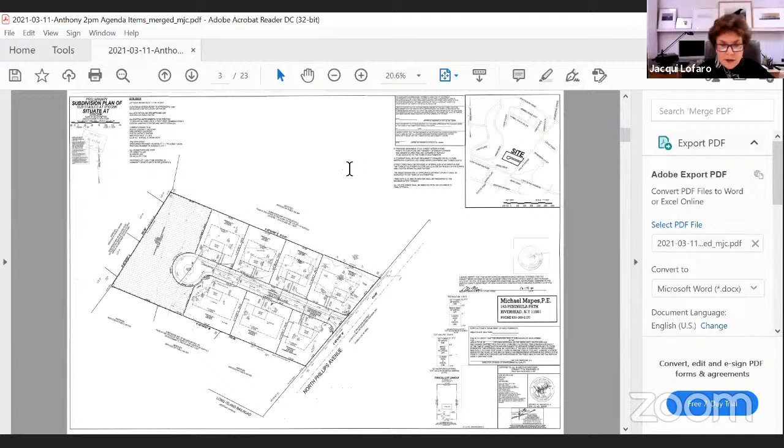You can get the aerial on that because I have a question on that flag. Sure, that road comes right across the driveway. This yellow is what you're assuming is going to be the driveway for both properties? Who's going to own that strip? There's going to be 2 flag lots, basically a line right down the middle, a flag lot back here and a flag lot back here.

Within those flag lots, there will be a 20-foot wide common driveway and utility easement that will get a common driveway, covering portions of those properties. So they will be owned by whoever owns these properties. There will be a maintenance agreement that goes with it, since there's a pond involved.

So obviously, they have to remove this driveway. They know that. And like I said, if they could get this person to join in on a common driveway, I don't have a problem with that.

That would make sense. But if they can't do it, this person could certainly get a driveway over here. But then you're going to have a lot of curb cuts on that. Yeah, no question, Robin, but I don't think this board could force this property owner to.

If I could jump in here quickly, it's related. Can you identify yourself for the record? David Gilmartin of Farrell Fritz. I represent JETCAB. Our office is at 50 Station Road, Watermill, New York. JETCAB is related to the owner of that property, and we anticipate doing a common driveway easement for all 4 lots.

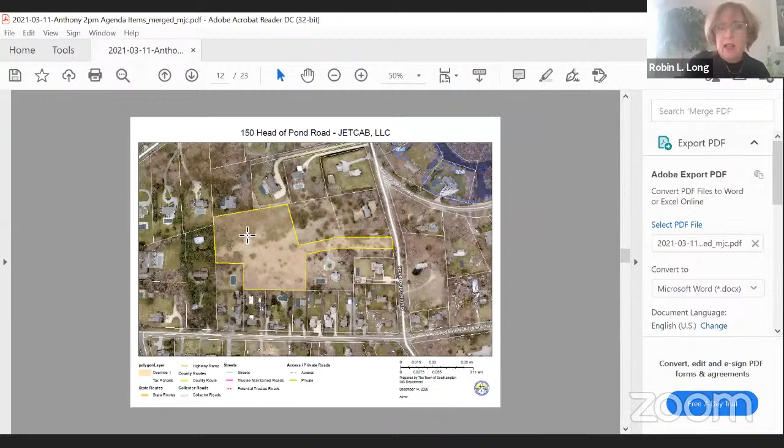We'll have that discussion. That looks like it has, if you look at where that pool is, you see there, right where you just were, it seems like there's some old trees in that area too. Yeah, there's some over here.

Go ahead, George. We would anticipate doing a significant buffer between the properties. As you look to the east, those are some pretty small lots. We've been in contact with those neighbors, and they're anxious to see us put up a buffer, and we're anxious to put it up, for the privacy. So the whole property will be buffered. Yes, that will be accomplished.

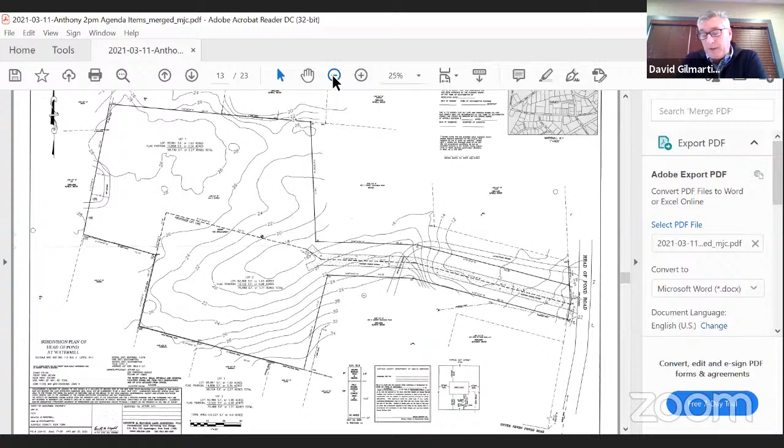The one thing about the north side that got recommended by the Conservation Board, I think we'd like the opportunity to do some sort of evergreen there. So as long as we could leave that open to talk about, maybe we can do a landscape plan for you and show you what we anticipate. Anthony was good enough to share the report with me earlier in the week, and I was able to discuss it with my client, and that was the only real issue that he had, that area up in the north. He'd like to be able to make that look nice.

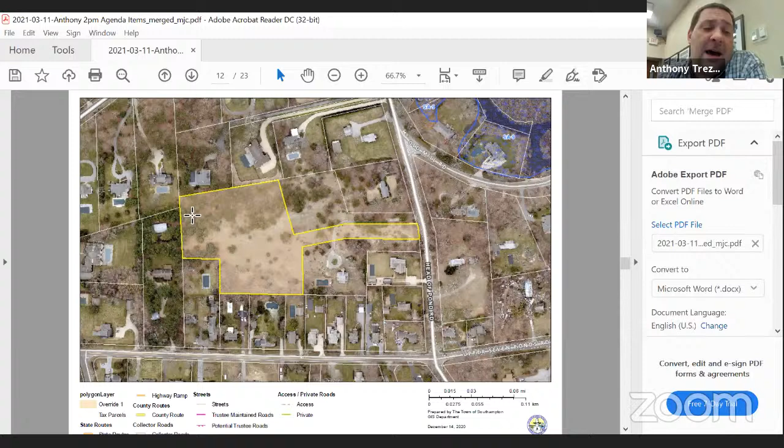So the buffer between the properties up to the north, who I believe we've been in contact with also, so we can make something nice up there. But we can come back. What did conservation say? Is there some natural vegetation, native vegetation? They were talking about a buffer up here. Obviously, Dave said they have no problem doing the buffer. I'm talking about the trees.

There was just that the property's largely been cleared over the years, and there's been some revegetation that's occurred on the northerly portion. So they're recommending a buffer of natural vegetation. To be quite honest, I don't have pictures from when I was out there a while ago, so I don't remember exactly, but we could certainly keep in the buffer requirement, and we could talk about augmenting buffers with additional plantings when we get to it.

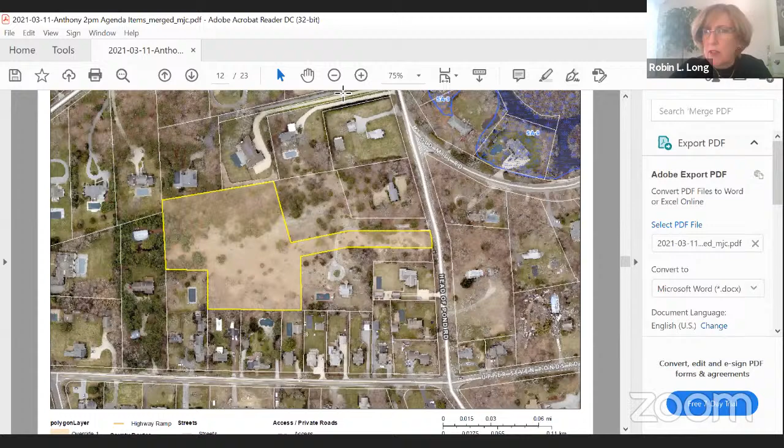David, I think that's a great idea. If you can get a landscape, even a preliminary landscape plan, so you have a better idea what you're talking about, to augment, as opposed to some of these properties where they just clear cut all of the old native vegetation and put in nursery stock, which is a different animal completely. Okay, we'll put something together and we'll work that out. Thank you, good, thank you.

So I'll amend this buffer area now that we had this discussion with Dave. Again, there's a little driveway and fence encroachment on the west side of the property, and it should be removed. It's very minor, and that area should be revegetated, but I'll look at that again as we get closer to the final and see what it looks like out there at that time.

Compliance with the town engineer, we had all their comments. The final map shall note the extension.

Excuse me, can the applicant submit some photographs to us? Sure, yeah, this is something you want to see, so they can certainly take some photographs and submit them. No problem, we could do that.

What are you looking for photographs of? This area that you're talking about for revegetation, right? Anthony, were you there? Yeah, I don't have a specific recollection of being out there, and I don't have the pictures available. I probably have some pictures, Jacqui, to be quite honest.

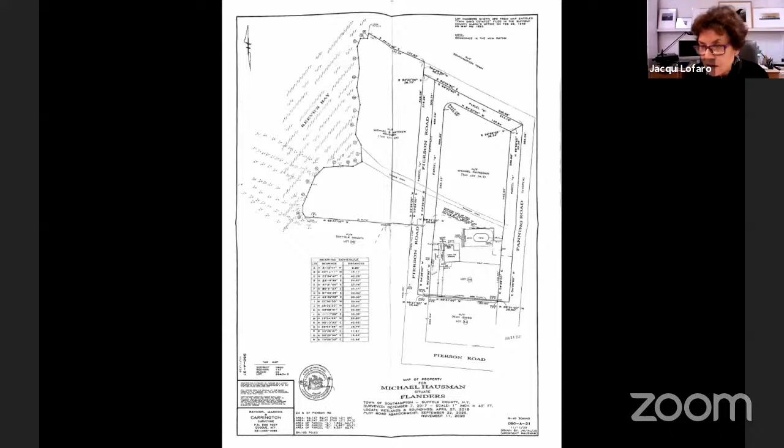And it doesn't inhibit anyone else's access or egress, correct? It does not, nope, because it's at the terminus of this road and it basically wraps around, and there will still be access to the town properties on the east. And there's also town property to the north too, so. Oh yes, here too, up there, yes.

And my clients really wanted to do this because there's been dumping, people have been going down Pierson Road, and to the left the waterfront property is unbelievable. It's all, it doesn't have Phragmites, it's an amazing piece of property. And this way they could put up a little fence to keep that pristine, because it's kind of an isolated area of Flanders, but it's unbelievably beautiful.

That's all I can say about that. Is that right, this, you know, and the drainage area goes through. And you know, it's just an amazing waterfront piece of property, and the idea is to protect it.

And also the town owns to the south of it too, which he said some people have been dumping a little bit on, and he cleans it up. But that would still be accessed, I mean that's not blocked off. It's just the area where the two properties are further up there.

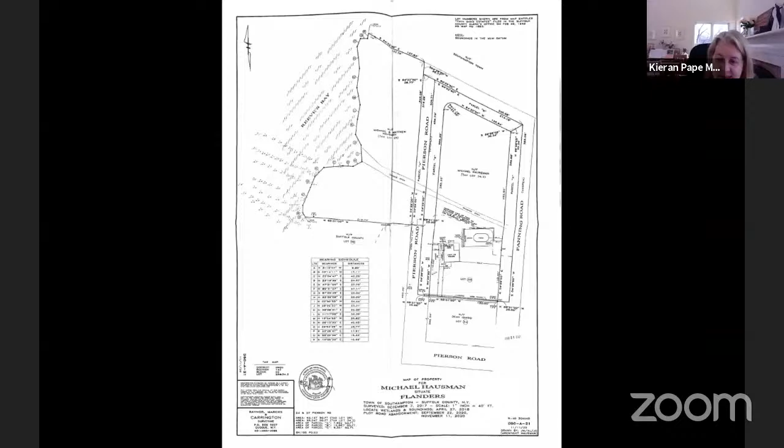Yeah, where the end is. Is that access to Great Peconic Bay, or what is that water? Reeves Bay. Okay, thank you. Yeah, it's beautiful, very shallow, and I got to go out - it was wet, but it was incredible.

So anyhow, I think we get it. Are there any comments or questions by the board, or Karen? Jackie, I just wanted to note that I put in compliance with chapter 325 for all wetlands as a finding within the resolution.

Good, so I have a motion to adopt this. Motion by Gloria, second by Robin. All in favor? Aye. Opposed, abstention, 6 in favor. Okay, thanks, Karen.

Good to see you all. Bye. So Jackie, you also have a no objection to abandon another portion of another road. Yes, this is on behalf of the town. Let me just pull up the aerial, give me one moment.

And so I apologize for not getting out of the shared screen. Sorry. That's okay.

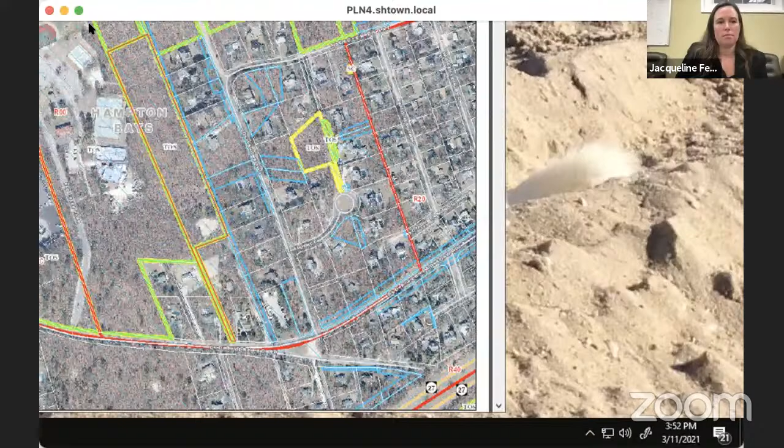Okay, so this is actually a town-owned property. We are utilizing this for sending flow for some of the affordable units that the town has donated to certain development projects. We are dealing with this as part of the Woods at Hampton Bays application, and they are currently at Health Department. There is this Franklin Road, which is included now in the parcel - Franklin Avenue, I'm sorry. And it continues up. If you remember, we had that discussion about an alternate trail route from Squires a couple weeks ago. So this is actually that road that's used as a very nice trail and is maintained very well, and gives access to the further Great Red Creek area to the north.

This was a portion of a subdivision. So unfortunately, Franklin is still here and was not abandoned. So we are trying to work and facilitate - this is the portion of Franklin you can see here to abandon. It would still be town owned and preserved, but for the Health Department to acknowledge the full square footage and sanitary flow, we need to formally abandon that road.

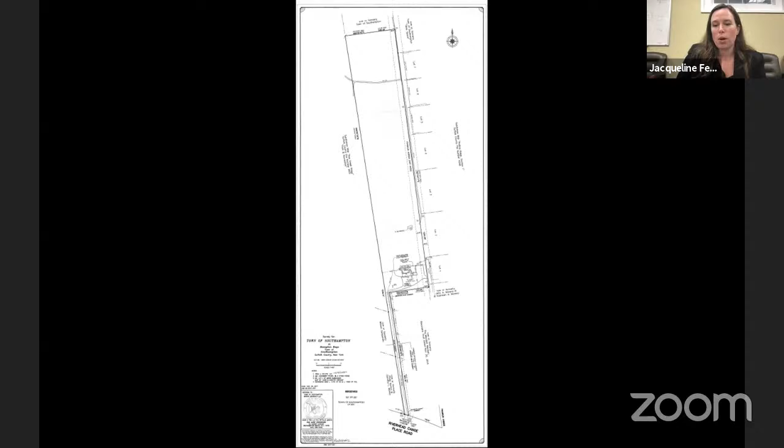And this was the previous subdivision that noted it, but it was not abandoned at that time either. And that's the deed when the town took title to it. So this would be a no objection to the abandonment of Franklin. Any questions? Motion by Gloria, second by Dennis, all in favor. Opposed, abstention, 6 in favor.

Thank you, Jackie. You're up again for a site disturbance. Oh, yes. If you could please let in Erik - I'm forgetting his last name right now. Erik, let's see here - McKee, sorry, McKee. This is the discussion where he wanted to discuss with the planning board the possible off-site preservation for additional clearing on site. Let me just pull up those materials, give me one second.

Charles, were you able to find Erik? Yeah, he's here. Okay, hi, I'm here. Thank you. Okay. Are you pulling up a map, Jackie? Or is it - yeah, sorry, I just, with those two in a row, give me one moment. I'm sorry for the delay.

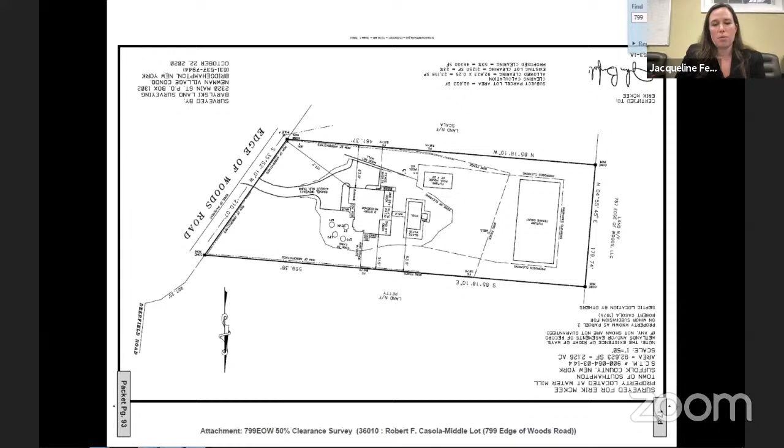This is again - oh sorry, the survey is the wrong way. But you can see here that the clearing is appropriate, and he does not exceed the current clearing restrictions. So we have been talking back and forth - he would like to expand the clearing, let me just rotate this for you, sorry. So he was requesting to have 50% clearing where 25% clearing is required. This is a survey that shows the intent of the future development. He does have a development right, which is from the Long Pond Greenbelt area, and it is in the Aquifer Protection Overlay District, so he wanted to review his request with the planning board.

And I'll basically turn it over to Erik so he can explain his specific situation, and then let me know if you have any questions. Thank you, Jacqueline, can you hear me? Yes. Thank you all for your time. Yeah, it's a pretty simple request.

Clearly I'm just over the 90,000 square foot clearance bracket, so just under that 35%, or about 3% larger than that clearance rate. I've been looking for a way to have a bit more of a backyard for my kids. I have a reasonably sized plot of land, but unfortunately no backyard, as you can see by the clearance. So I'd like to increase that.

I was looking a lot for transfer development rights. Unfortunately, as far as my experience is, there are really two people that I found, the Gazas, and their prices were impossible for me to afford. And then Miss Dorothy Dayton has a transfer development right that is a bit larger than what I need, but would work well for my property. So I'm looking to grow a backyard for the kids and to improve the property, and that's really what it is.

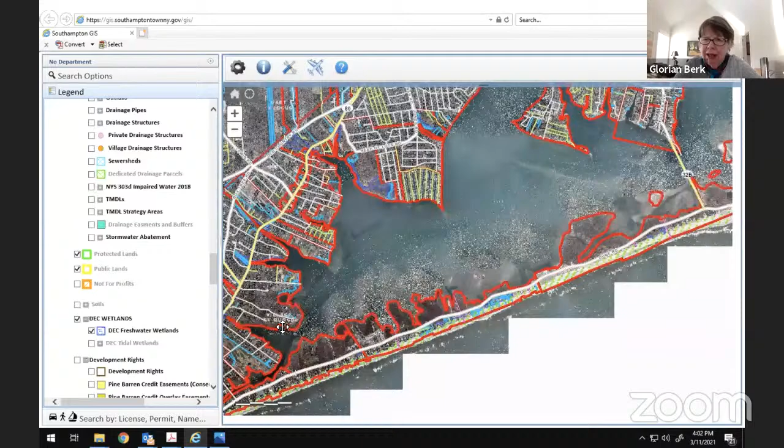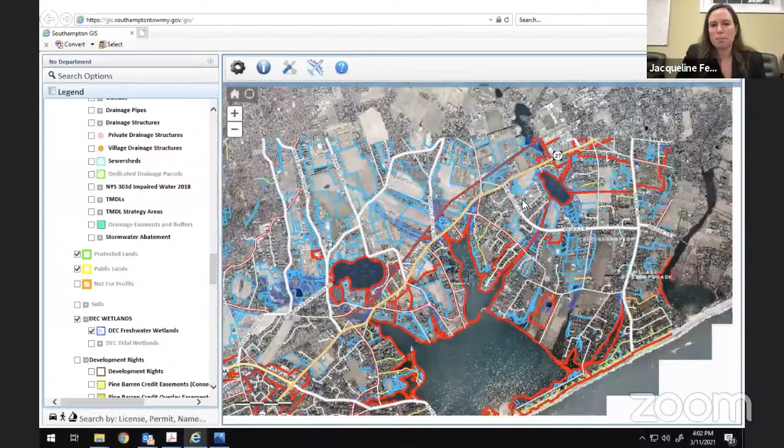Jackie, I would want to see the Dayton's property. I can try to pull it up just to show you where it originated from. Sorry, I was over in Speonk, and I don't understand the machinations either, so if you could better explain what she did and how it's preserved. Sure, you know what, let me see. Yeah, close. She's right here, I believe.

Go to Sag Harbor Turnpike. She's right off the turnpike, right here. So see this blue? This is what issued the development right certificate. And I believe she had a yield of 3 or 4 lots, so she just elected to do 2. This is her existing residence.

I didn't want to get too much into her specific stuff because it's just a development right that's already been lifted. But as you can see, this is surrounded by the town open space and is part of the greater Long Pond Green Belt, which is to the north here with the beautiful trails. So that's where it's originating from. And it is the Aquifer Protection Overlay District, given that it's a large, unfragmented portion of open space. I thought the development right was appropriate, but the applicant, before he went through with the purchase and agreement, wanted to speak with the planning board and see if you guys were amenable to this.

The one thing I did want the planning board to consider is he's subject to 25% clearing. The next threshold for properties under 90,000 square feet would be 35% clearing. So he's essentially jumping up 2 levels in the table of clearing percentages. I don't know if that matters to the board. No, say that again, that doesn't make any sense.

So a 92,000... the threshold for aquifer protection is like 60 to 90,000 square feet, allows 35%, which he's basically just over that because his property is 92,000 square feet. Okay, so he's cleared his max. Yeah, he's cleared his max and he's at 25%. So the next threshold, if he was under 90,000, would be 35%. And then the next threshold under that, if he was more like an acre property size, is 50% clearing. But he's not. Why is this even an issue?

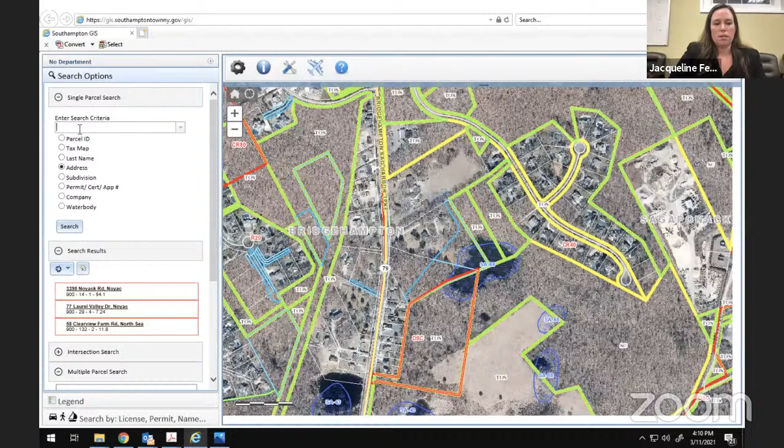So the mechanism is there, but it's really a policy decision on a case-by-case basis for this board to make - whether or not you're comfortable doing it.

See the site, it's surrounded by development. I know the area well. There's power lines behind it, it's surrounded by home sites. There's no large tract of open space, wildlife area that would serve the need - it's just a yard expansion.

What's the property behind him? That, I believe, is privately owned, residentially improved - 757 Edge of Woods, owned by Edward Beaton. I do have the public lands loaded, Jackie. So that's the green town, and this is Suffolk County, and this is the town right here. But that green strip, I believe, is the power lines. If I'm not mistaken, that is correct - and then this is a Suffolk County facility.

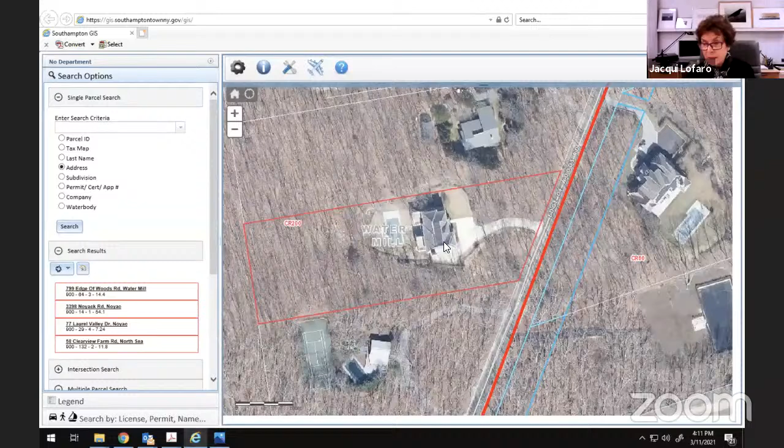People are going to say, 'Well, I'll just keep my development, I'll do a house lot there.' Right, it's that there's no incentive.

She couldn't build on that property anyway because it's near - now it is sterilized, but overall, in the end, she couldn't build there because she wouldn't have the setback from the wetlands - there's a big pond there. It should be clustered, but she had a yield there - I think she had a 3-lot yield. So she reduced her yield and also preserved the area around the pond.

So now, the screenshot we're seeing right now, it looks like there's some overclearing across the property line. No, you can't go by those property lines, they're not accurate - you can go by the survey. Unfortunately, no aerial can ever be perfectly over each individual property. So this is the correct clearing line here. Thank you - so does it change?

So what are we doing? How does it now come up? What is the mechanism now in title?

Now he would submit a formal site disturbance application, which is a higher fee. Right now, he did a work session for a discussion with the board to see if you guys were receptive. The formal application would be a site disturbance application where we would entertain basically allowing him to proceed with the survey shown here, which allows him to get 46,300 square feet, where normally he would be allowed to have the 23,156. And it would be formalized by the recording of a covenant.

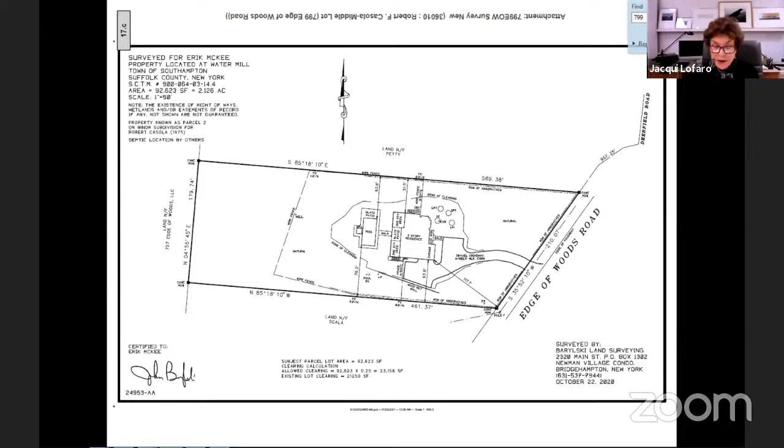So the logic here is that it's already preserved. But Jacqui, I just want to explain, it could be used someplace else to do the same thing - go clear and put a house on there. So you're taking out the house equation because you're using it for clearing, taking that credit away, which could be landed somewhere else in the town. So it is preserving at the end of the day, potentially reducing density.

But Jacqui, when she reviews it, is going to clearly spell it out, outline the section, the code. But generally speaking, I think you're in favor of it, so he can proceed on a case-by-case basis. Yes, and that's what the code directs us to do - that's why the code is very vague. When you look at the waiver provisions in the APODs, at the very end it says we have to make findings that it's keeping with the intent of the chapter and the goals of the chapter. Right, it gives us flexibility.

Exactly. Okay, so there's no action on this - this was a discussion, and it was a good one. And we'll wait for your application. Yeah, wherever you are on this. Oh, you're up here now. Okay, thanks very much, thank you for your time.

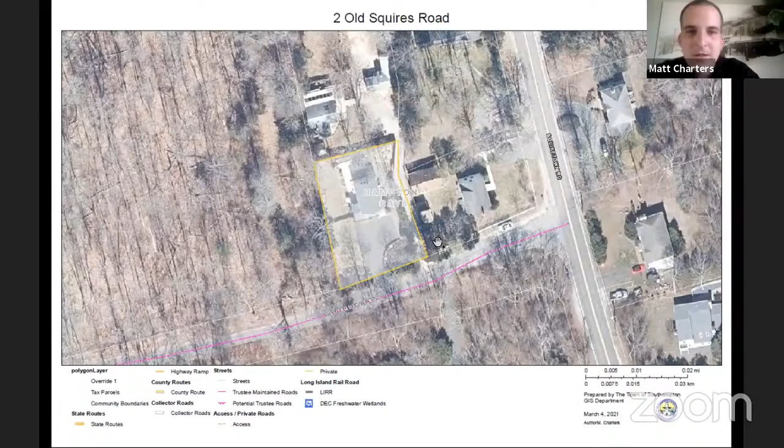This is off Squiretown Road, a small property we're looking at here, 12,293 square feet, so he's pretty limited on what he can do there. 75% clearing - he is over cleared. This was captured by the building department in plan review, and we did get a plan that went through some changes. You can see here, this is the survey - these are the areas. There's actually some existing vegetation in the front which they're going to supplement, make it a little bit better, and they're going to do the side. I know it looks like only a little corner in the back, but there is a huge portion of open space here - I believe this is owned by the town, so it's going to abut some natural vegetation.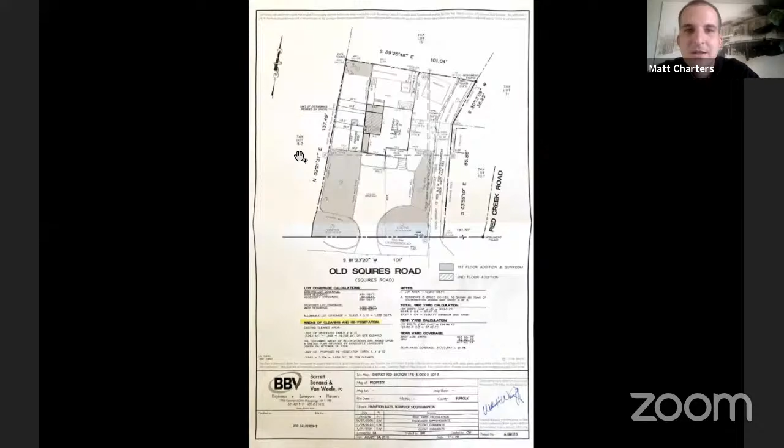This is their plan, and typical conditions - they're overcleared by about 1,500 square feet, and I think they're doing about 1,800 square feet of re-veg for this little guy in Hampton Bays. We have our new conditions on there just to show the limit of clearing, so the building department can verify it before they do any work. They have a year to do it with one extension, and then we'll need those surveys for an inspection after it's implemented.

Okay, any questions on this? Motion by Dennis, second by Zuccarelli. All in favor? Opposed, abstention - 6 in favor.

Now we have the town - there you are, Michelangelo. The town board referral on the moratorium. Hello everyone. Hi.

So yes, we're doing a town board referral for the extension of the moratorium in Shinnecock Hills. I'm going to share my screen. Okay, one second please. So here are our moratorium areas, A and B. In September of 2020, as you're probably all aware, we imposed a moratorium regarding archaeological areas of significance for the Shinnecock people. Since then, we have been working with an archaeologist named Joanne McLean to come up with recommendations on how we can pursue future development in these areas. So we're now extending this moratorium in efforts to develop more information and allow Joanne McLean to provide those recommendations.

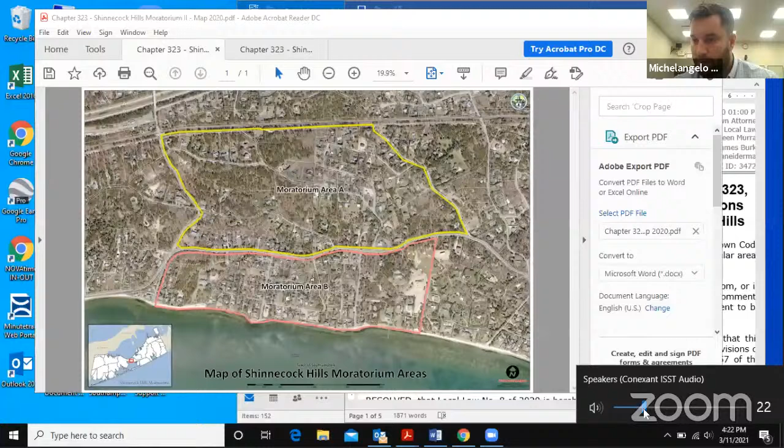Moratoriums are so often underestimated in terms of how long they take. Every moratorium I've seen is coming back for an extension. That's why I'm asking about 3 months. Maybe we should make a recommendation that they do it for 6 months instead. I don't know, how does the rest of the board feel?

I think the intent of municipalities is to keep moratoriums as tight as possible, because otherwise they become subject to takings or so forth. So they're probably proceeding cautiously, and they might even be under the advice of counsel.

That's why I'm asking about the 3 month number. They might be back with us for another 3 months, but they'd rather do a 6 month block than 2 separate 3 month blocks. I'm just guessing, I don't know. How long has it been now, Michelangelo? Has it been 6 months? Well, I'd have to refer to Kathleen.

Okay, well whatever it is, are we in agreement that a 3-month extension is okay? Absolutely. So, motion? Motion by Dennis, second by Gloria, all in favor? Aye. Opposed, abstention, 6 in favor.

Thank you, thank you. Mike, can you just take down the map? Yes, of course. So Clare, you've got Wireless Towers Westhampton. Wait, there's a minute, I think I'm on the wrong page. Hang on, ZBA referral?

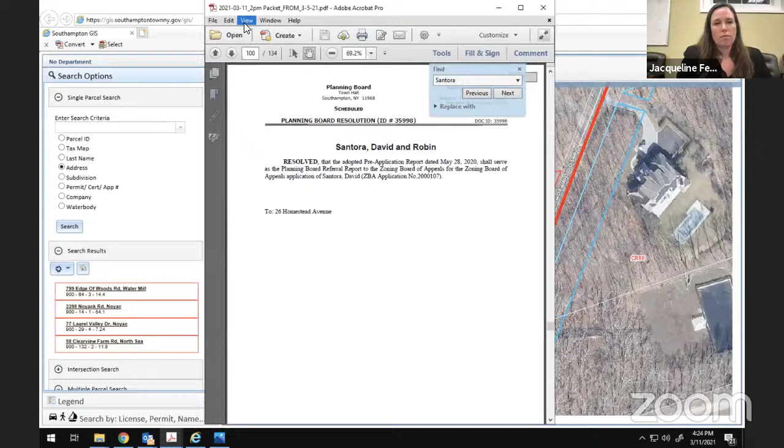ZBA referral, Jackie Fenlon, hi, how are you? So we looked at this at the pre-application stage. Let me share the screen. So this is just the basic resolution, and then this is the aerial. This was the Robin and David Santora subdivision, so they're the owners of the subject property. They're proposing a flag lot with access along the north where the existing driveway is, and one additional lot, which looks like this on the subdivision map.

So this is the driveway area. They do need a lot width variance where 120 feet is required; they're requesting 111 for that front lot where the existing home is. Our report was just adopted on May 28th, 2020, and we noted the lot line modification. The subdivision would require a lot width variance, which is noted right here. So I have a resolution to have our report serve as the ZBA report.

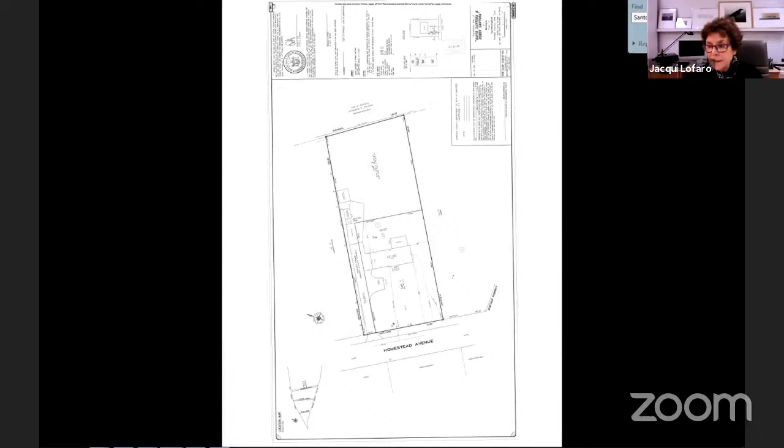Any questions or additions? If not, a motion to accept the referral by Gloria, second by Dennis, all in favor? Aye. Opposed, abstention, 6 in favor.

Now it's Clare, the wireless tower cemetery visual analysis. A couple months ago you deemed this incomplete; we needed some additional information. At the time we received a visual analysis, which I think needs to be supplemented prior to any decision you make for SEQRA purposes. The applicant's representative, Bailey Larkin, needs to be let in.

I think I saw her, Charles, if you could let her in. My suggestion is that we go through the visual analysis a bit and see if you have comments about any additional points or views you'd want to see while considering the application and its visual impact. We were also awaiting the archaeological assessment, which we just received today, so I'm going to take a look and see if it's sufficient. We'll hold that issue off for now, but when Bailey's in, you want to introduce yourself, Bailey?

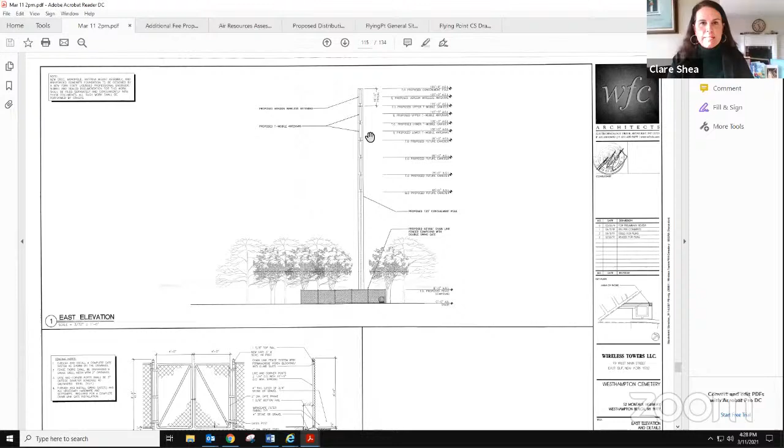I'm not quite sure how it happened, whether the owner sold that portion off and the town bought the rest, or if the town was a party to that. I'm not quite sure. But yeah, this is Town of Southampton open space, CPF, 28 acres. As far as I know there's no trail shown on it, but it's a nice piece of open space, and someday we may actively improve it.

What's the fall zone on this, Clare? The fall zone would have to be... for a 100-foot tower, it has to be 300 feet, right? It's 125 for the fall zone for setbacks for property lines as designed now. For the house it would have to be 375. Yes, and so that's 391.

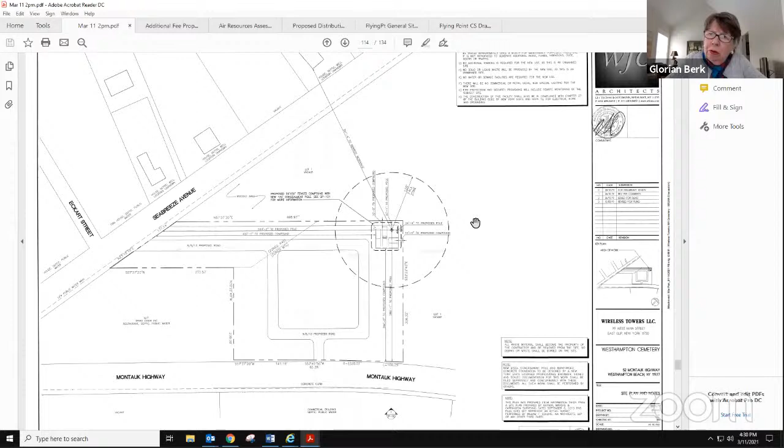And Clare, if I understand this correctly, since the pole is going to be at the corner of the property, the fall zone is on the town-owned land. Yep. Or on somebody's grave.

Well, the fall zone would be on someone's grave in this area here, if you see my cursor, I hope. Yes, it either is on the town open space parcel, which will not be developed, obviously, but it is town-owned open space for the enjoyment of the town, for open space purposes, whether it's trails or other purposes. This may be developed as a community park.

Yes, and that's also a thing. So the views from this are kind of, that's the other point I was going to make, and we can talk to Bailey about this. They've shown some views like from down here and up here, and you can't see it, but this is town open space. Somebody could be standing here and looking at it, and that affects your enjoyment of a parcel that was for purposes of the town or the people of the Town of Southampton to enjoy.

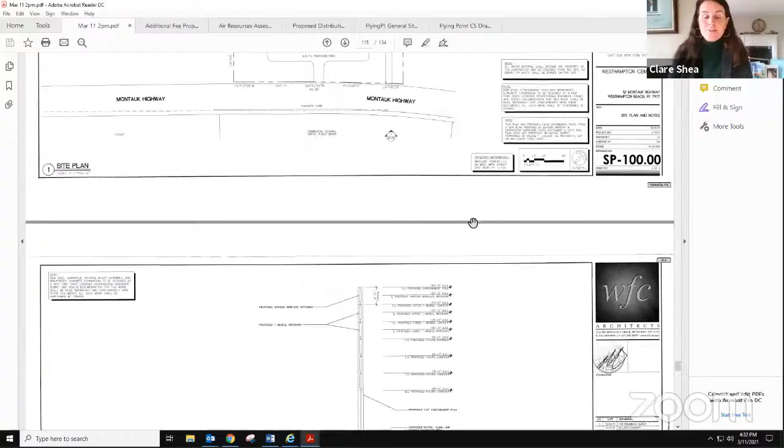So, have they submitted alternative sites? I'm not quite sure if they have said in their application, and I'm going to have Bailey speak to this. There is a lot of information in the application, which I've forwarded pieces of because there's a lot of information, but I will continue to forward anything you need. They have said they've investigated a lot of sites, including the old cemetery, which I said has no room currently. So, but these are all questions you have as you assess the application, and questions you might have during the process. I just wanted to give you an overview of that before we looked at the visual.

Do you want to look at the visual? Or do you want Bailey to address the alternative sites?

Well, briefly, I know we were talking about the fall zone of the tower and how it would potentially fall within those, to the cemetery property and potentially into open space. But what we can submit, and what we have in other applications where this board has considered a reduced setback to a property line, is an engineer's analysis confirming that, God forbid there were any sort of catastrophic failure on the part of the tower, the site would be designed so that the pole would completely fall within the property itself.

So it wouldn't be an issue of falling onto the town open space parcel. But it's something we can have our engineers prepare a letter and confirm, and it would obviously be a condition of any approval that it would be engineered to comply with that requirement.

I know the town has looked at a reduced setback on the wireless towers application approved in Hampton Bays on Mr. Tortorella's property, which was about 35 feet off the property line to the east. There was a reduced setback to the north, but I can't recall exactly what it was. Also on the Elite Towers site in Bridgehampton, there was a reduced setback of approximately 38 feet.

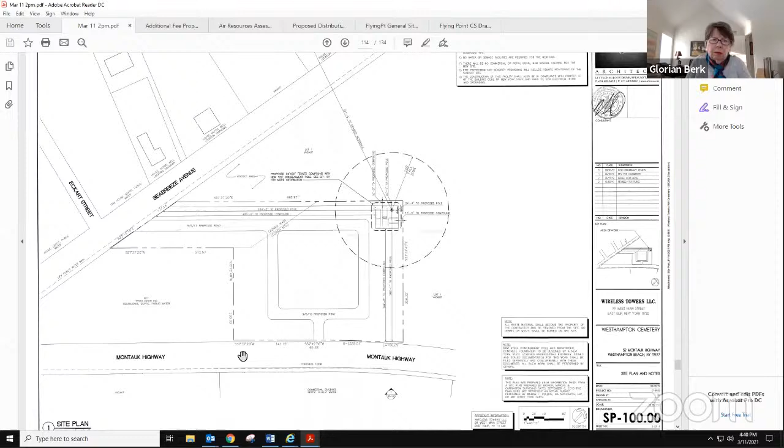If I share the screen, I'll share. This is the visual report, which I'm going to send to you. I just got it electronically, so I'll send it to you after the meeting so you have it. They used a drone. These are the viewpoints they have.

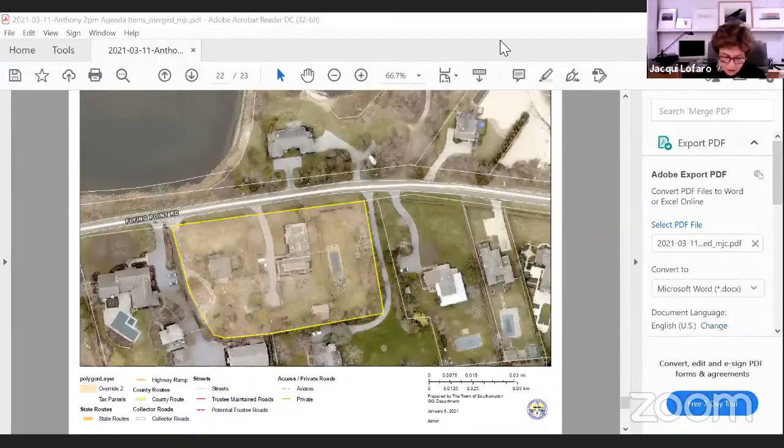So what I'm going to suggest is, since this is a very simple matter, let the ZBA do the SEQRA determination. I'll do these SEQRA documents and we'll take care of it at the ZBA at the next meeting, is what I would recommend. Any comments on that? Any issue? We don't need to act on this, do we? Just to relinquish the lead agency to the ZBA. How does everybody feel about that? I never like it, but I understand this. Trust Anthony, he'll do a good job.

Yeah, that's the one, for the modification. It shows the island west of the roundabout in the center of Rogers Way, and also the entering traffic coming into the employee lot off of Rogers Way, and the combination of the exit from the employee lot with the van exit on site. So those recommendations were incorporated, so I assume those will find their way to a site plan as well.

Right, and can you just indicate where the covered area is going to be, for vehicles that are parked? Is that right where your cursor is, Clare? It's her cursor, yes. Okay, that's the covered area.

I thought it was at one of the ends, from my memory of the illustration you had. Madam Chair, it's at the end of the face of the building, but on the side of the building that's away from Old Riverhead Road, purposefully.

Okay. And we're showing, just want to check, we're showing BOCES. Does BOCES show on any of this? Have you incorporated that? BOCES is not part of the development, it's just to the southwest, and the counts previously done were done when BOCES was operational, so it has been captured and considered. And to Ray's point, we can analyze a year in to see if there's additional impact, but based on what we've analyzed, we don't expect there to be.

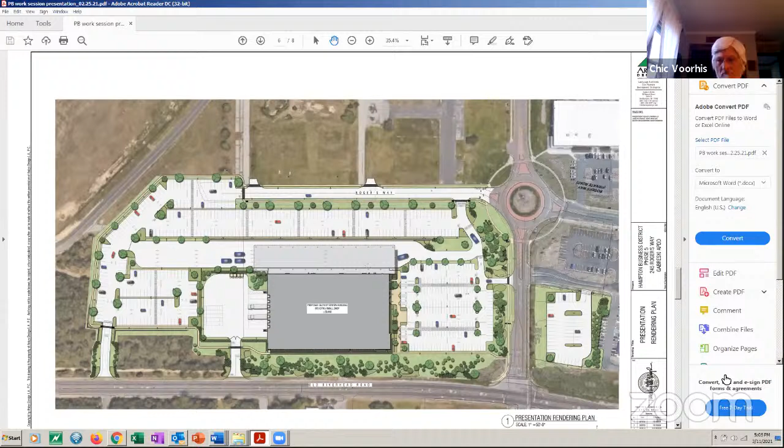Good afternoon, that sounds like my cue. Hey Dennis, Jacqui, board members, Chic Voorhis, Nelson Pope Voorhis on behalf of the applicant. Thank you for the intro, Clare.

Clare had flagged this as a potential environmental issue, and I prepared a report dated March 9th, 2021. Hopefully Clare will get that to you. It looks at the location of the proposed project, which you all know, and characterizes the existing and proposed development, and what was actually looked at in the GEIS at the time the county assigned the master developer, in this case Rechler Equities and their various companies that have been developing the site. It talks about how there's been a significant reduction in the total amount of development that could be realized on the property, and that's not directly applicable, but it is indirectly applicable to potential air impacts.

Potential air resource impacts were not identified in the original EIS work, which was basically for over 800,000 square feet of space. Currently the full build out of this, including the last site that you don't have before you at this time, is less than 400,000 square feet of space. So it's a lot less than what was anticipated originally, and that was really the only point of that.

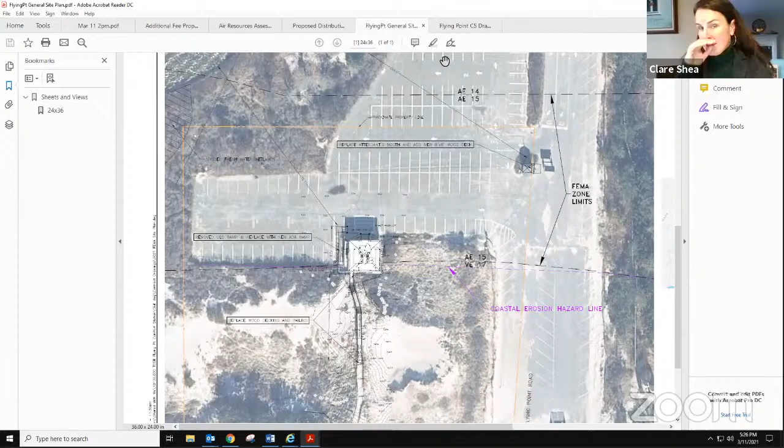Scoundrels, I know. So they're replacing this attendance booth entirely, but in the same kind, in place. The building's staying, but the decks are being rebuilt, the walkways rebuilt, and they're redoing the interior of the building. I will do a SEQRA resolution, just a simple resolution that says approved, conditioned on the location of the outdoor shower being shown on this plan.

How's that sound? That sounds good. Okay, Dennis, make a motion.

Probably shouldn't say this on the record, but I keep a bar of soap on the top rafter. No one else in the town can reach it. Now I can get it.

Okay, so motion by Dennis, second by Gloria. All in favor? Aye. Opposed, abstentions.

We have one more thing to do. It's within our purview to appoint a secretary, and we will need a secretary for minutes, attendance, and map signing. So it's up to the board to elect someone. I'll entertain a nomination.

I'll nominate Glorian Berk. I'll second. Glorian Berk, seconded by Robin. All in favor? Aye. Do I have to vote? Opposed, abstentions, 6 in favor. And Gloria, 0 additional compensation, Gloria.

That was Gloria, thank you. Fine, thank you and congratulations. I'm sorry to have to take over the spot. I know, it's very sad. But thank you for picking up the baton.